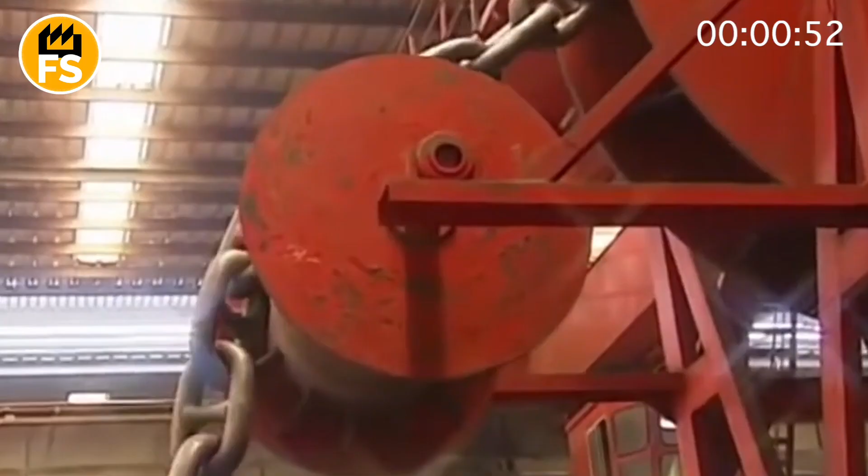stormy sea. These giants of marine engineering don't work in the quiet of a harbor, but in the harshest conditions on the planet, under insane weight, with temperature fluctuations from -40 degrees Fahrenheit to positive 120 degrees, in salt water that eats away even the strongest steel.

The first and most important step in producing anchor chains is choosing the right steel. For chains that must withstand tremendous tension in the open sea, low alloy structural steel with increased strength, impact resistance, and corrosion resistance is used. Its composition is selected so that the chain doesn't break from metal fatigue, isn't eaten away by salt, and doesn't

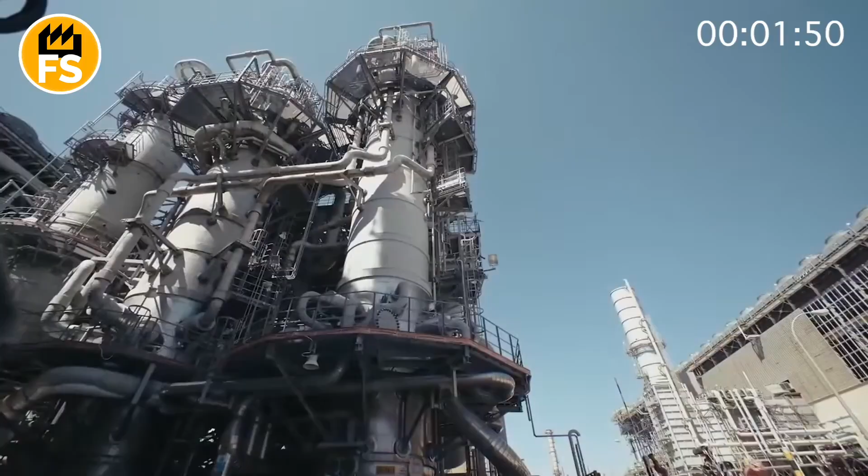crack from temperature fluctuations. Factories receive steel in the form of solid rods or square bars, which look like long metal beams. Their diameter usually ranges from 3 to 6 inches, and their length up to 10 feet. The weight of one such piece is hundreds of pounds. All of this is stored in open assembly yards or inside large metal hangars, because the parts can withstand any weather conditions. Before being fed into production, the steel is checked for purity of composition. Even minor impurities can make the metal brittle.

After quality inspection, the steel heads to the cutting lines. These are long automated sections, where massive rods are transformed into blanks for links. Each steel rod is picked up by a hydraulic manipulator and placed on a guide. Then, the main hero of this stage comes into play: a hydraulic guillotine press, or a cutting saw with carbide discs. The device calibrates the length, and when the blank is in the correct position, it presses with a force of thousands of pounds per square inch.

With each loud thud, a characteristic crunch is heard, and a piece about 3 feet long is separated from the rod. This piece will become one link of the future anchor chain. A counter is displayed on a special screen or directly on the machine's body. It tracks how many links have already been prepared and whether the length needs to be adjusted.

Each cut piece falls onto a conveyor or into a basket, where it is automatically checked by a laser scanner. If the system detects a deviation in length or an uneven end, that piece is sent back for remelting or trimming. The pieces that pass inspection are moved on to heating furnaces, where a bright orange heat of over 2,000 degrees Fahrenheit awaits them. This temperature allows the steel to soften without losing its structural properties. It is there that the steel will become pliable and ready for bending into links.

The cut pieces of steel, incredibly thick, rough, and heavy, are still cold, so they can't be bent at all. To give them the shape of a link, they need to be made pliable. The blanks are fed onto a roller line that leads directly into an induction or gas furnace.

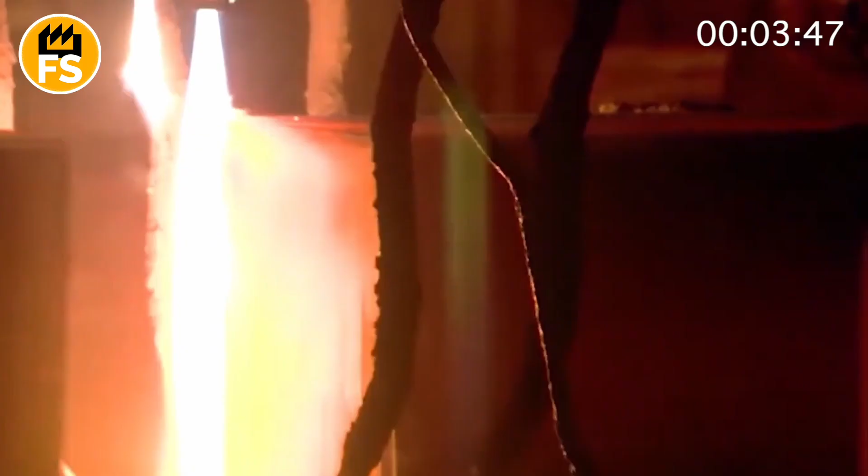Inside the furnace, a dull hum can be heard, and the air is heavy, hot, and saturated with a metallic smell. The blanks lie on stands or are suspended on special rods and are gradually heated for 20 or 30 minutes. Externally, they begin to glow, first cherry red, then orange, and finally almost white. This is a visual indicator. The steel piece is ready for forming.

As soon as the piece reaches the required temperature, it is quickly removed by a robot or a worker in a heat-resistant suit, because there's no time to waste. Steel loses heat very quickly, and if it cools by even 200 or 300 degrees, it will no longer be bendable. That's why the logistics of the hot chain production are so well coordinated.

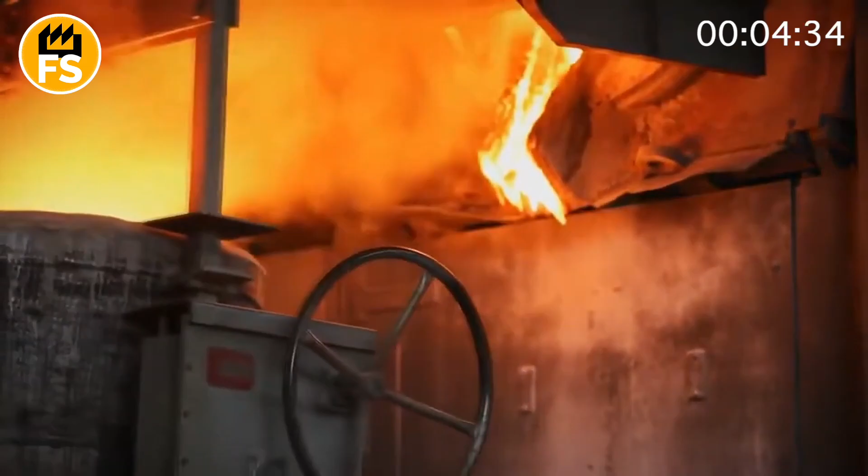Every second matters. As soon as the 2,000 degree Fahrenheit blank is removed from the furnace, it is instantly transferred to a bending machine, which looks like a hydraulic press robot with metal arms. These units can easily manipulate pieces weighing several hundred pounds, rotating, securing, and bending them with surgical precision.

The essence of the process is simple at first glance. The blank is clamped between two massive forming rollers, one of which rotates around an axis. At the same time, the other presses with a force measured in tens of thousands of pounds per square inch. The steel yields and smoothly bends, forming a perfect ring with a diameter of up to 4 feet.

While the metal is still soft, the ends of the link are joined, leaving the joint area slightly overlapped. Then the link is transferred to a welding station, where gas-shielded arc welding automatically begins. The temperature, over 5,000 degrees. The electric arc literally melts the edges and stitches them into one whole.

The finished link is almost a part of the anchor chain, but before it is connected to others, the seam must be ground, heat-treated, and checked for defects. And only after this does it become part of a chain capable of holding a supertanker weighing hundreds of thousands of tons in a rough sea.

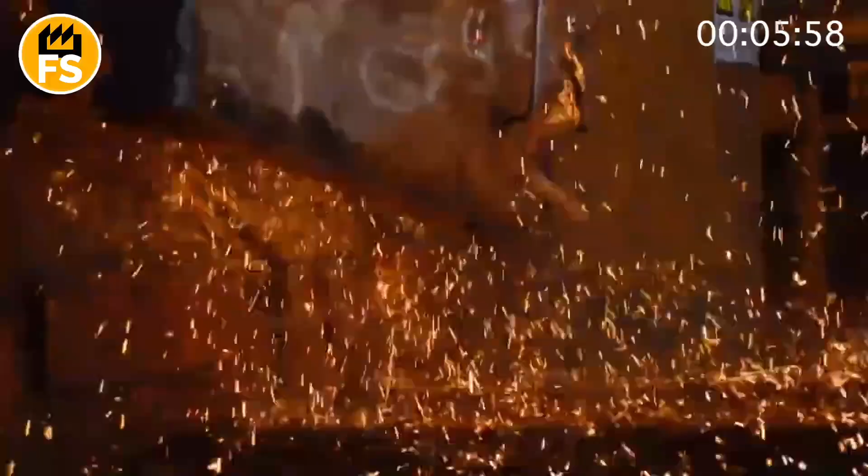While the link is still hot and pliable, it is immediately connected to the previous one, threaded through the already finished link. Only after this is the link closed, the seam welded, and this entire dual unit undergoes further processing. After all, it's impossible to open the previous link without damage, which would affect the chain's strength.

When a link is welded, a noticeable seam remains at the joint, a bit rough, with weld spatter and metal buildups. In this state, it won't pass any tests, as it could catch on other links or even become a weak point under pressure. So, grinding comes into play.

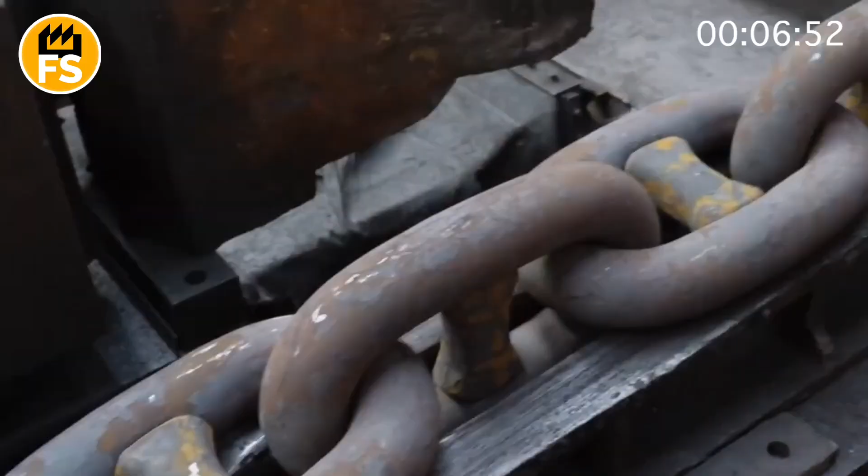On a huge table, similar to a workbench for airplanes, lies a link weighing under 300 pounds. It is secured so that the seam is clearly accessible. An abrasive machine or an operator with a powerful grinding tool gets to work, which roars, sparks, and makes a characteristic buzz sound.

The goal is to smooth the seam as much as possible, remove micro cracks and excess metal without damaging the main structure. Grinding takes place in several stages: first coarse, then medium, and finally, polishing. For this, discs of different grits are used, from 24 to 120, and sometimes even higher.

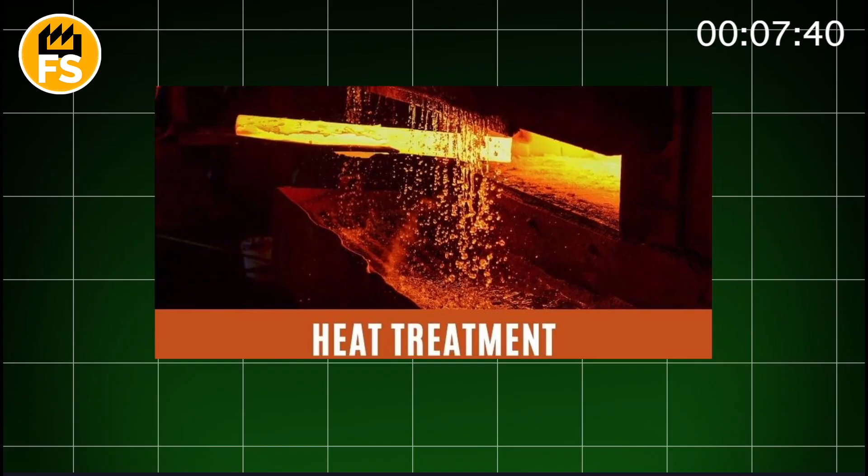After grinding, the link is blown with compressed air, cleaned of dust, and at this stage, it already looks like a perfect ring. But an external shine is not yet a guarantee of strength. So next comes heat treatment. Heat treatment strengthens the metal structure and makes the chain capable of withstanding insane loads in the depths of the sea. This is a complex series of thermal processes that are carefully controlled.

First, the links are heated in furnaces to a temperature of 1,700 degrees Fahrenheit. Huge chambers, resembling metallurgical tunnels, hold dozens of links at once. Here, it is important to achieve uniform heating throughout the thickness of the metal, so that no internal stresses arise that could cause micro cracks.

Next comes quenching. The links are rapidly cooled, usually in baths of oil, water, or a special salt solution. It is this temperature jump, from red hot to cold, that creates a hardened crystal structure in the steel. The result is increased hardness and wear resistance. But after quenching, the metal becomes too brittle. So the next stage is tempering.

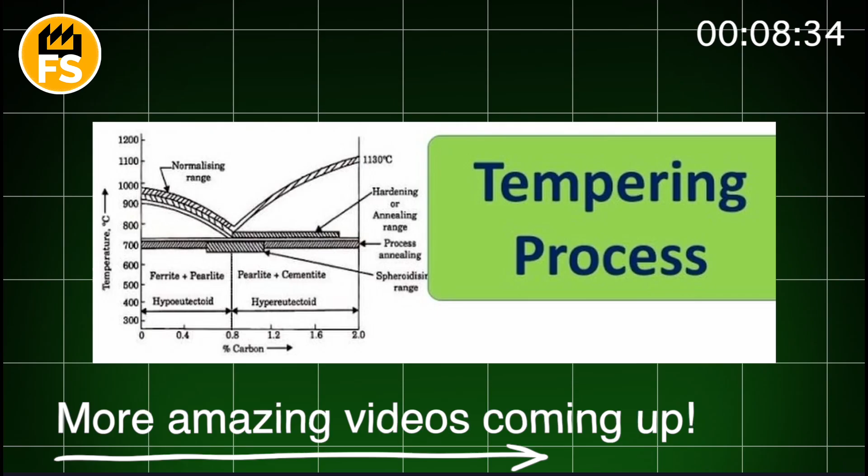The links are placed back in the furnace, but at lower temperatures, approximately 1,000 degrees Fahrenheit, and held there for several hours. This allows residual stresses to be relieved, restoring elasticity and a balance between hardness and strength. Sometimes induction hardening is used, where heating occurs locally, only in the areas that experience the greatest loads. For example, the inner surfaces of the link where it connects with others.

After heat treatment, the links are coated with an anti-corrosion layer that protects the metal from salt water, moisture, and rust. This is usually a hot dip galvanized coating, or epoxy paints, applied by dipping or spraying. Before this, the surface is degreased and ground again. The coating must lie evenly on every indentation, because the durability and safety of the entire structure depend on this.

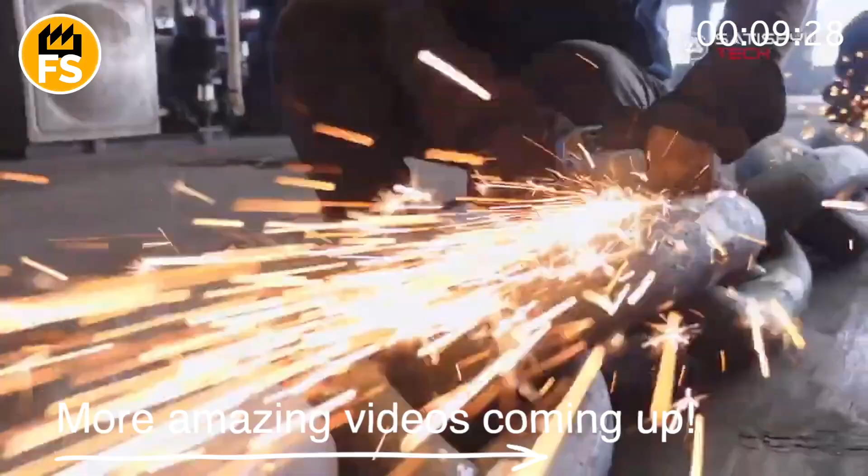Imagine taking the air you are breathing right now and turning it into a substance that can freeze ice cream in 3 seconds and make a banana tough enough to hammer nails. This is not magic. It is liquid nitrogen. Every second, it is used in medicine, science, the food industry, and in some top-secret experiments.

Temperature, -321 degrees Fahrenheit. One sip, and you lose part of your stomach. One breath, and you unlock tomorrow's technology. How does the coldest substance on Earth get made from regular air? How is it transported, stored, and used? And why can it save or destroy? Watch closely and prepare to be amazed.

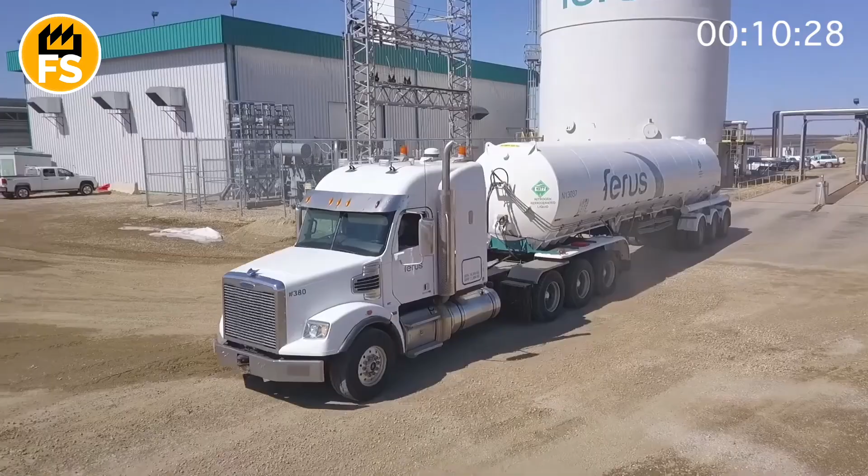It all begins with air. Yes, the very same atmospheric air that surrounds us. This happens inside industrial air separation units. These systems come in all sizes, from massive factory installations to mobile units for medical use.

Air is sucked in using compressors. Then it passes through filters. First, coarse filters that remove dust, insects, and pollen. Next, fine filters get rid of moisture, carbon dioxide, and other impurities. Once cleaned, the air is compressed using powerful machines, increasing both pressure and temperature. Then, it is gradually cooled in heat exchangers.

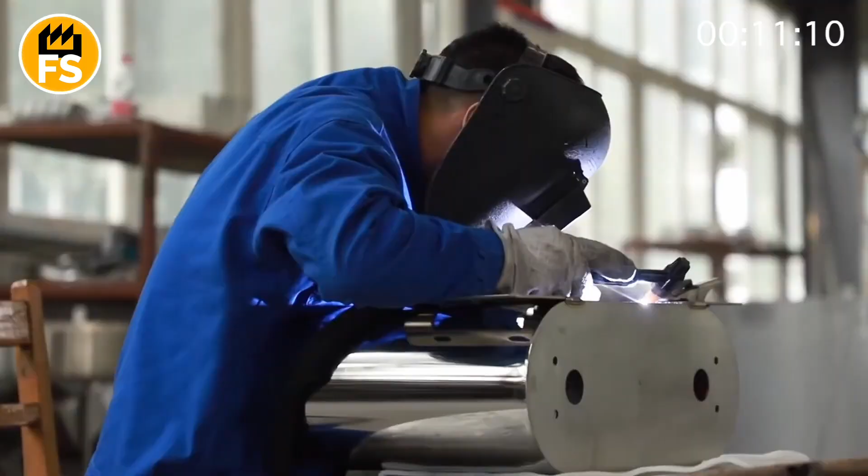When the high-pressure cooled air moves through a narrow nozzle into a low-pressure chamber, it expands rapidly. That sudden expansion causes a major drop in temperature. This is the key moment. The gas becomes cold enough to start condensing into a liquid. This process repeats several times. Each cycle drops the temperature further.

Eventually, nitrogen reaches its liquefaction point. This technique does not work with every gas, but it is perfect for nitrogen. Thanks to this, we can create liquid nitrogen from ordinary air. Once the air is chilled and liquefied, it goes through fractional distillation. This process separates the liquid mixture into components based on their boiling points.

Inside a special distillation column, the liquid air is gently reheated. Nitrogen has the lowest boiling point, around -320 degrees, so it evaporates first and rises to the top. Oxygen boils at -297 degrees, so it evaporates later and does not climb as high. Argon, with a boiling point around -302, settles somewhere in between.

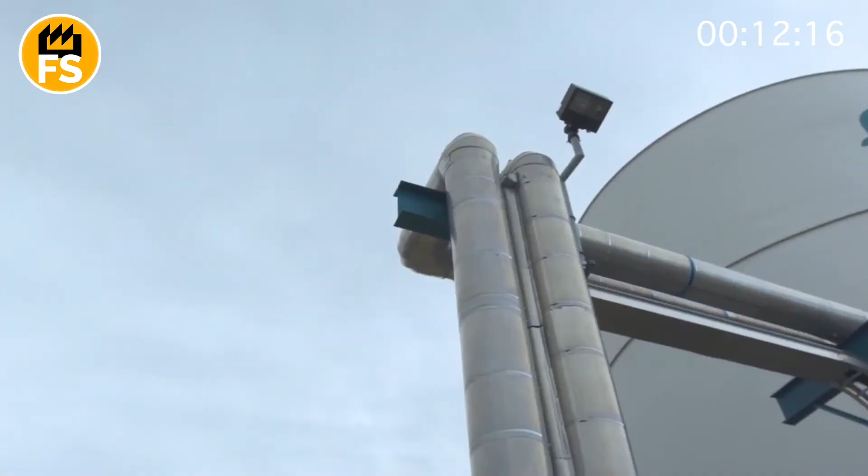The column forms a thermal gradient, colder at the top, warmer at the bottom. The gases evaporate and condense over and over, becoming purer with each cycle. It all works without additives, automatically, and with minimal losses, thanks to precisely managed pressure and temperature. Since nitrogen makes up roughly 78% of air, extracting it takes powerful equipment, a complex network of pipelines, and exact temperature control.

Once separated, liquid nitrogen is stored in special vessels, cryostats, or Dewar flasks, which look like futuristic thermoses. These vessels keep temperatures low and prevent evaporation. They are not just metal barrels. They have double walls with a vacuum in between to block heat. Some also include reflective coatings to minimize radiant heat loss. These containers can preserve liquid nitrogen for several days to several weeks, depending on volume, insulation, and how often they are opened.

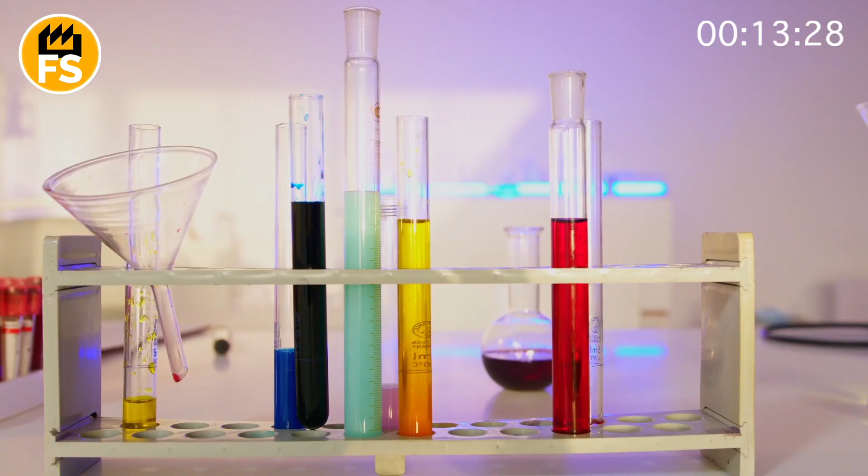Often, nitrogen is used right on site. For example, medical facilities use liquid nitrogen for cryopreservation of cells, embryos, vaccines, and tissues. In the food industry, it is used for flash freezing. Contact with liquid nitrogen instantly freezes food, locking in texture, taste, and shape. But when it needs to be transported, preventing evaporation is critical. That is because nitrogen quickly turns back into a gas.

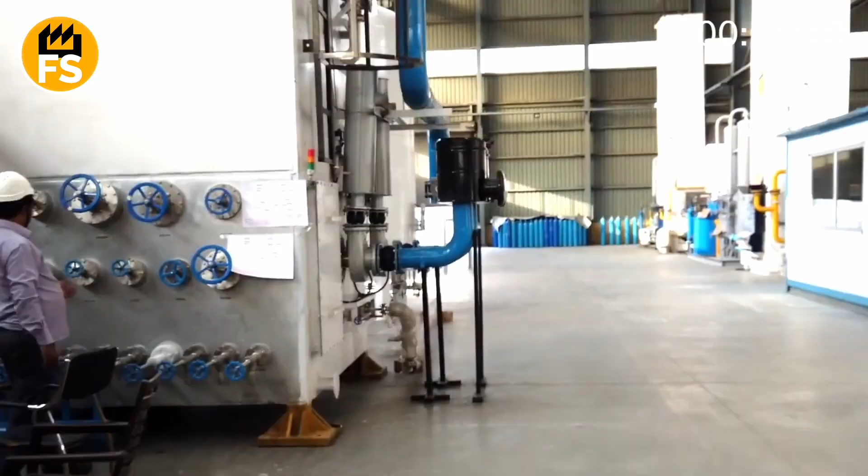Portable dewars, cryotanks, and cryotank trucks are used. Small dewars are handy for labs and clinics. Cryotanks are massive, like giant gas tankers, and are hauled by trucks with special mountings and ventilation. Cryotank trucks are purpose-built vehicles with insulation and pressure regulation to avoid explosions from expanding gas. Sometimes, liquid nitrogen is produced directly on site, at large research centers or hospitals, to avoid reliance on deliveries.

How did humanity tame one of the coldest, most inert substances on Earth? It all began with nitrogen. Discovered in the year 1772 by Scottish chemist Daniel Rutherford, who was studying air and found a gas that could not sustain fire or life. That was nitrogen, colorless, odorless, inert. But liquefying it required cold and pressure, and humanity needed more than 100 years to figure that out.

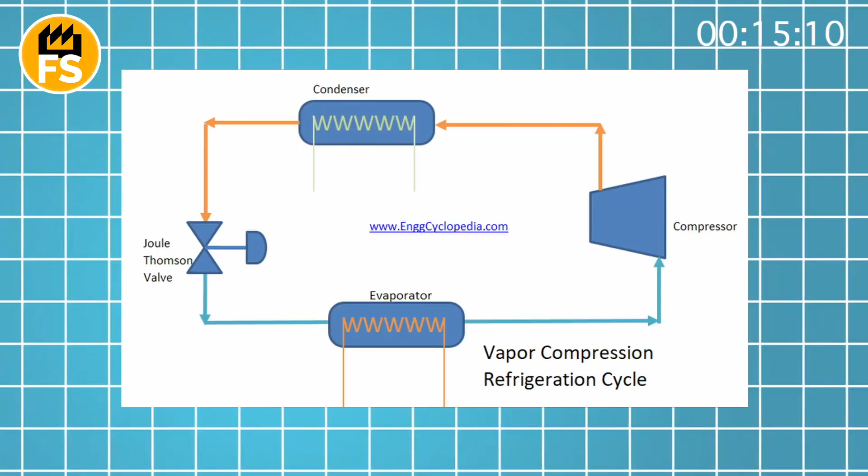The first liquid nitrogen was produced in 1883 by Polish scientists Zygmunt Wroblewski and Karol Olszewski. They built a system that cooled air so much that nitrogen, its main component, turned into a liquid. That was a breakthrough. In the 20th century, cooling tech advanced fast. Scientists improved gas liquefaction methods and eventually developed the Joule-Thomson cycle, which relies on pressure drops to efficiently liquefy gases.

In the 1930s and 50s, liquid nitrogen made its way into industry and medicine, starting in labs, then into surgeries, biobanking, and physics experiments needing ultra-low temperatures. Today, liquid nitrogen production is a global-scale operation. It is made in massive air separation plants around the world. What was once just background gas, making up almost 80% of air, has become a superstar of industrial science.

Some chefs even make ice cream live, pouring cream into a bowl, adding liquid nitrogen, mixing, and voila, instant dessert. The cold is so intense, it freezes the treat in seconds. Dip a banana in liquid nitrogen for a few seconds, and you can hammer nails with it. Seriously. Want to try? Inhaling cold nitrogen vapor can temporarily change your voice, like helium, but deeper. But do not try this. It is dangerous without protection and special equipment.

Some people have dipped old socks into dewars of liquid nitrogen. Result? The fabric becomes brittle like glass and crumbles in your hands. A perfect way to destroy evidence. If you are a sock. Pour liquid nitrogen on a warm floor, and it turns into a dramatic cloud. It vaporizes instantly, making you feel like you are stepping through a Hollywood portal.

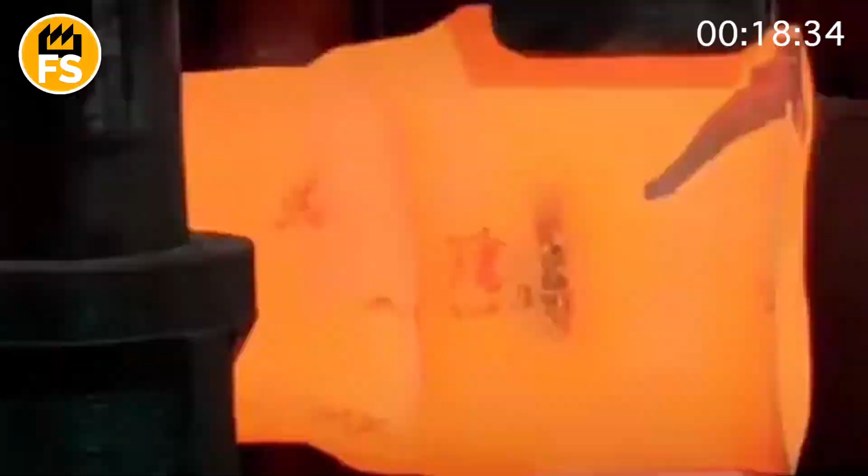How does a gleaming superdisk, capable of withstanding thousands of revolutions per minute, emerge from a gray, spongy mass? What do aviation, medicine, and the titanium hell of furnaces have in common? This isn't just manufacturing. It's a show of strength, precision, and engineering magic. Let's dive into a world where metal takes on its perfect form.

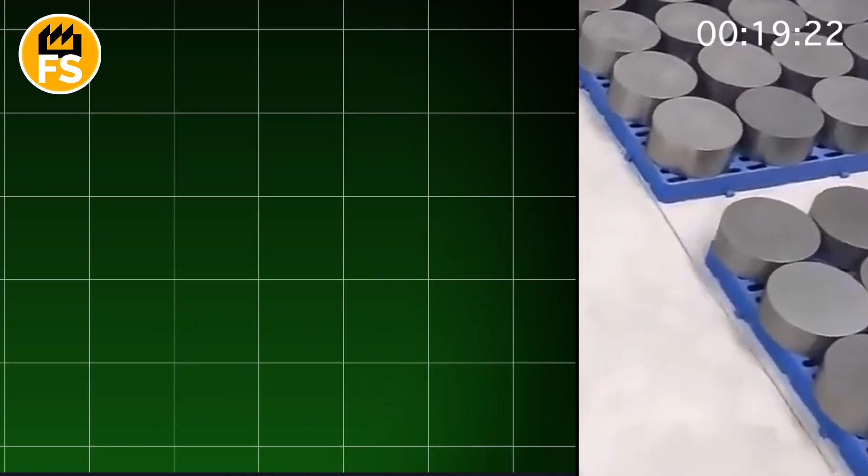Titanium discs are blanks shaped like thick discs made from titanium or its alloys. They serve as the starting material for parts in highly critical fields: aviation, medicine, space, energy, and automotive manufacturing. Titanium is a true superhero among metals. It's lightweight yet extremely strong, withstands insane temperatures, resists corrosion, and doesn't react with the human body. That's why it's used for everything, from aircraft components to implants.

But pure titanium is a bit finicky. It's difficult to machine and can be brittle under certain conditions. Therefore, it's often mixed with other elements, creating alloys. The most popular alloy consists of titanium with 6% aluminum and 4% vanadium. It's strong, wear-resistant, and easier to form. Aluminum adds lightness and heat resistance, while vanadium adds flexibility. For medical devices, pure titanium or alloys without toxic elements are used.

Depending on the task, titanium can be harder, more ductile, or more resistant to extreme conditions. That's why manufacturers choose not just titanium, but the specific alloy that perfectly meets the particular challenge. Titanium for discs comes from titanium sponge, the primary raw material extracted from ores, mainly ilmenite and rutile. The largest deposits of these ores are found in Australia, South Africa, China, Kazakhstan, and Canada.

But the sponge itself is produced where complex manufacturing facilities exist because the process of converting ore into metal is very energy intensive. It all begins with a dirty grey, pumice-like substance, titanium sponge. It arrives at the plant in large containers and bears almost no resemblance to the future aerodynamic part. But this is where the journey starts, ending with the gleam of a perfectly polished disc capable of withstanding thousands of revolutions per minute.

First, it's checked for impurities and moisture. Acids or solutions that react with impurities are used, removing them from the titanium surface. This process might involve treating the raw material in special baths. Titanium parts might also undergo abrasive treatment, such as grinding or sandblasting, to remove surface contaminants.

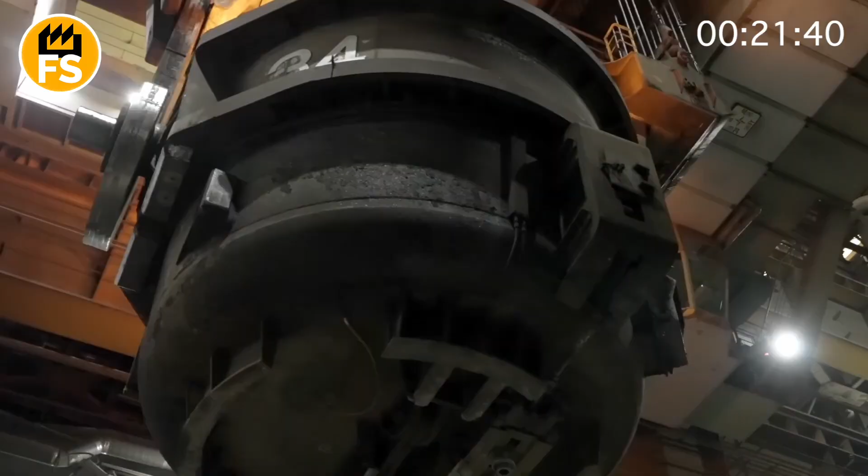After cleaning, the titanium raw material undergoes heat treatment to improve its structure. The raw material is heated to a specific temperature, usually between 1,300 and 1,600 degrees Fahrenheit, and held there for a defined period. This helps reduce internal stresses that might have occurred during previous processing stages. If necessary, the raw material can be heated to higher temperatures to achieve homogeneity in the alloy structure. This ensures an even distribution of elements within the material, enhancing its strength.

After heat treatment, the titanium undergoes a fascinating rapid cooling stage, which is quite a spectacle. When the metal is removed from the furnace, it glows with bright shades of red and orange, reflecting the high temperature it was heated to. Cooling can be done in several ways, by quenching in water or by air cooling. When submerged in water, you can observe the hot titanium creating foam and bubbles as it rapidly contacts the liquid, emitting a characteristic crackling sound.

This is visually impressive, as the boiling water witnesses an incredible transformation, from a potentially malleable state to a strong metal. Alternatively, air cooling is calmer, but no less captivating. The metal gradually loses heat, changing its color and texture. This process, although less dramatic, demonstrates the smoothness and elegance of titanium's transition to its final form.

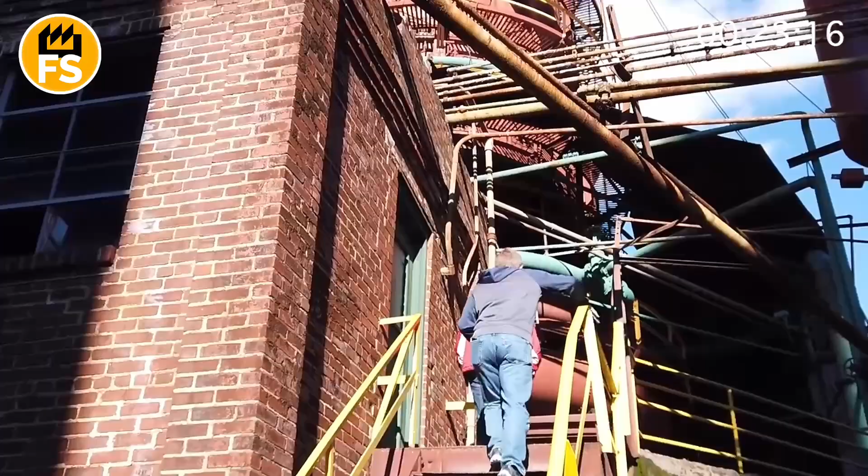Then, the material is loaded into special crushers or hammer mills. The main purpose of crushing is to reduce the particle size of the titanium, facilitating further processing and ensuring material uniformity. The crushed particles can be used in various processes, such as producing powder alloys or forming new parts. After crushing, the resulting particles may be washed to remove residual debris or impurities. They are then dried in preparation for further processing.

To manufacture the titanium discs themselves, the blanks are heated to high temperatures, typically up to 1,500 or even 1,800 degrees Fahrenheit. This is done to make the titanium softer and easier to work with. The heated blank is placed in a press or hammer. Impact action or pressure shapes the blank into the desired disc form. During this process, the titanium undergoes significant deformation, leading to changes in its structure.

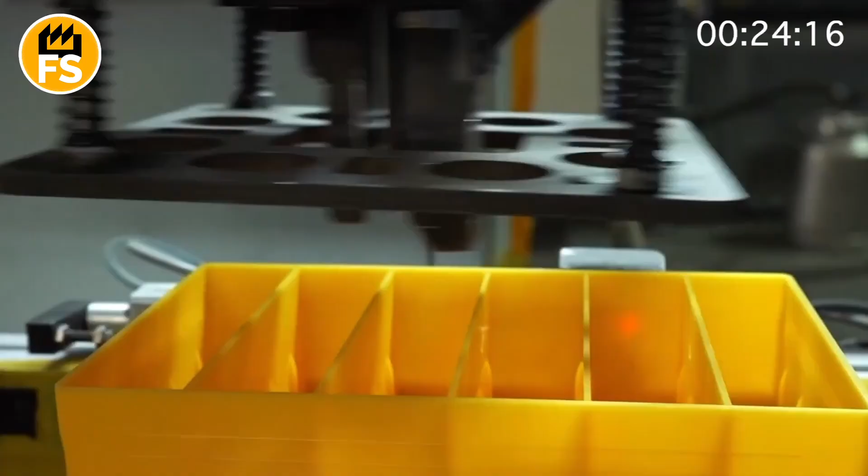For casting, however, special molds are made, usually from steel or cast iron. The molds must be very precise to ensure the correct geometry of the disc. The titanium is heated until it turns into a liquid. This is usually done in vacuum furnaces to prevent oxidation. The liquid titanium is poured into the prepared mold. After cooling, it solidifies, taking the shape of the disc. Casting allows for the production of discs with complex shapes that are difficult to achieve by forging.

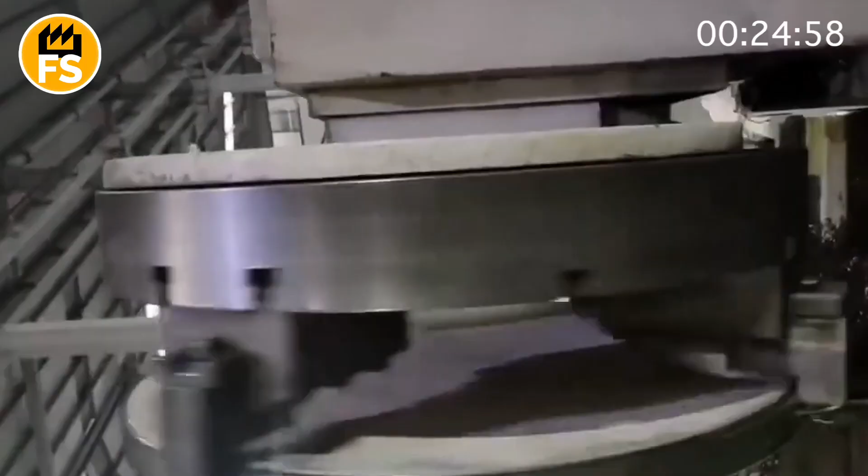Now it's time for machining. Before machining, the discs are cleaned of dirt and residues. For this, they are immersed in a special bath with a solution that removes slag and grime. The water foams up, and the disc becomes clean. Next, the discs are secured on lathes for stability during machining. A lathe is used to remove material from the edges of the disc, achieving the required diameter. Thin metal shavings curl away from the cutting tool like a slender snake.

The contours and profiles of the disc are formed according to technical specifications. If grooves or holes are needed, a milling machine is used. Then, the discs are processed by grinding machines to achieve the smoothest possible surface. This is important for reducing friction. Finally, they are polished to obtain a shiny surface, which also enhances their aesthetic qualities. Polishing can further protect the disc from corrosion.

After polishing, the surface becomes smooth, reducing the likelihood of dirt and moisture accumulation. Fewer imperfections and cracks mean fewer chances for corrosion. Polishing also seals microscopic pores that can retain moisture and contaminants. This significantly reduces the risk of oxidation. Afterward, the disc is inspected for scratches, cracks, or other visible defects. Calipers and micrometers are used for precise measurements of the disc's diameter and thickness.

To detect internal defects not visible on the surface, ultrasonic testing is performed. This inspection method does not require direct contact with the disc. A special transducer emits ultrasonic waves into the disc material. As the waves travel through the disc, they reflect off boundaries such as defects or the material itself. The time it takes for the waves to return to the transducer is measured. This allows for the detection and sizing of defects. Specialized software analyzes the received data, providing information about the disc's condition. This is a very fast process, allowing many discs to be checked quickly.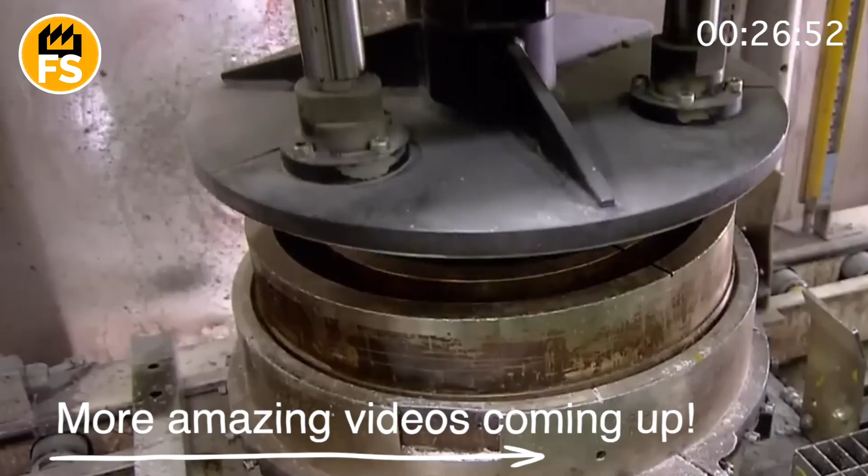Titanium is 40% lighter than steel, but has comparable strength, making it ideal for the aviation and automotive industries. It does not rust or corrode in most environments, making it a durable choice for various applications. In the United States, an average of 10,000 to 15,000 tons of titanium is produced annually. A significant portion of this amount is used for manufacturing discs and other components. Thus, on a monthly basis, this could amount to 800 to 1,200 tons of titanium discs.

Leading companies in the United States, such as Boeing and Lockheed Martin, actively invest in the production of titanium discs to meet the needs of their programs. It is expected that in the coming years, the demand for titanium discs for aviation will grow by 5 to 7% annually, especially considering new technologies and increased aircraft production.

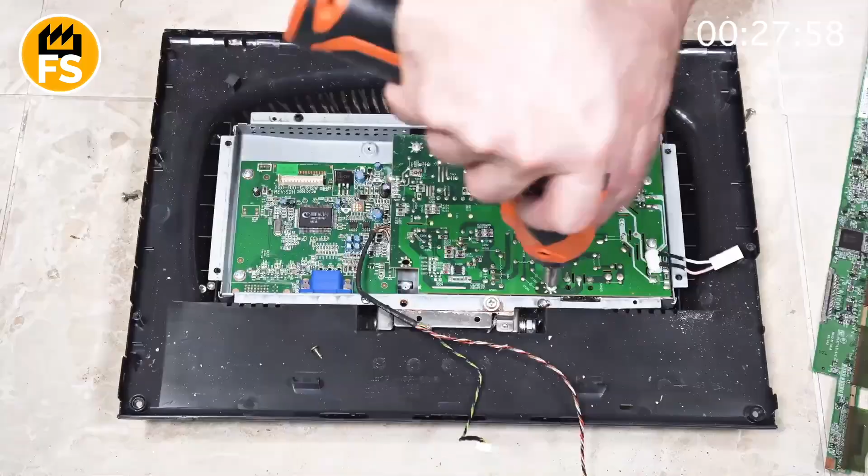As of the year 2025, approximately 135 million monitors are shipped to markets worldwide every year. This includes both new models and replacements for old ones, as part of a typical 4 to 5 year tech upgrade cycle. While it is difficult to pinpoint the exact number of monitors in global use, due to varying lifespans and growing demand, it is estimated to be in the billions. That is because as much as 66% of the global population uses computers. But what happens when it is time to recycle a monitor?

Cathode ray tube monitors, those old bulky screens, were common before flat screens took over. They contain glass with high lead content, phosphors, and electronic components. Lead in the glass can make up as much as 20% of a monitor's weight. Sounds dangerous, right? Light-emitting diode, or LED monitors, are the modern flat screens that use LEDs for backlighting. They are lighter and more energy efficient, but still contain plastic, metal, and rare earth elements.

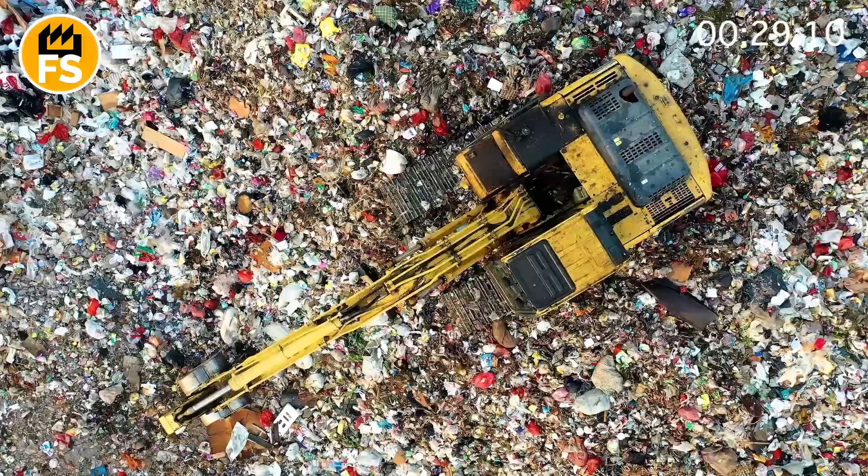Guess what? Mishandling these monitors can cause serious environmental problems. Lead from CRTs can leak into soil and water, and plastic from LEDs can take centuries to decompose. That is why recycling is not just a trend, it is a must. In the United States, over 4,400 million pounds of e-waste is generated every year, but only 25% is recycled locally. Every single day, Americans throw away more than 500,000 computers and mobile devices. This creates a massive environmental challenge.

Electronic recycling centers, like Repowered in Minnesota, play a key role in addressing this issue. Each year, they process about 3 million pounds of electronics, which makes up 5% of all electronic waste collected in the state. Impressive, right? These centers accept any device with a cord, except for large appliances, and ensure proper disposal or reuse.

Some states, like California, go even further. There, it is illegal to dispose of e-waste in regular landfills. California has over 600 drop-off locations, and recycling is funded through a fee on the sale of new monitors and televisions. By the way, California spans around 163,696 square miles. It is the third largest state.

Trucks are loaded with old monitors and driven to recycling centers. This method is typically used for short and medium distances. For long hauls, container shipping is used. It is more cost-effective and safer for large volumes of electronics.

At the plant, monitors are unloaded in the intake area, where trained staff inspect them for hazardous materials and evaluate their condition. The monitors are disassembled into key components, such as cathode ray tubes, display panels, power supplies, and other electronics. This process can be done manually or with specialized equipment. The separated parts are sorted by material type. Casings, power supplies, and other metal components are separated for further recycling.

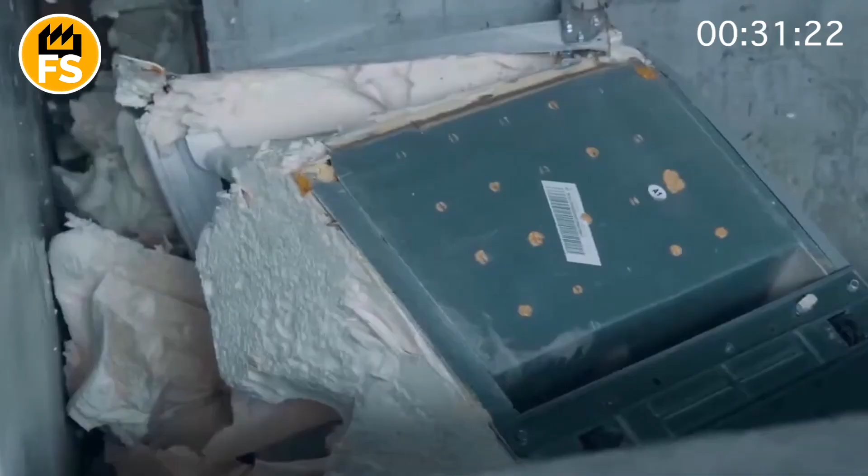Recycling metal parts from monitors looks like a full-on industrial operation. Massive machines work in sync to turn scrap metal into something new. Shredders roar. Furnaces blaze. The air is thick with the scent of molten metal and the noise of industry. Metal components are cleaned of contaminants like paint, plastic, and other non-metallic materials. This is done with machines that strip away surface layers and boost metal quality. Rotating brush systems or dedicated surface cleaning machines are used.

This step can also involve shredding, crushing, or other mechanical methods. Metals might also be treated with chemical solutions to remove corrosion and other residues, using acids or alkaline solutions to dissolve unwanted layers. Then, the metal is shredded into smaller pieces using large presses or industrial shredders. This makes it easier to process and transport. Next, metals are sorted by type. Ferrous metals are separated from non-ferrous ones. Each metal type requires a different recycling process.

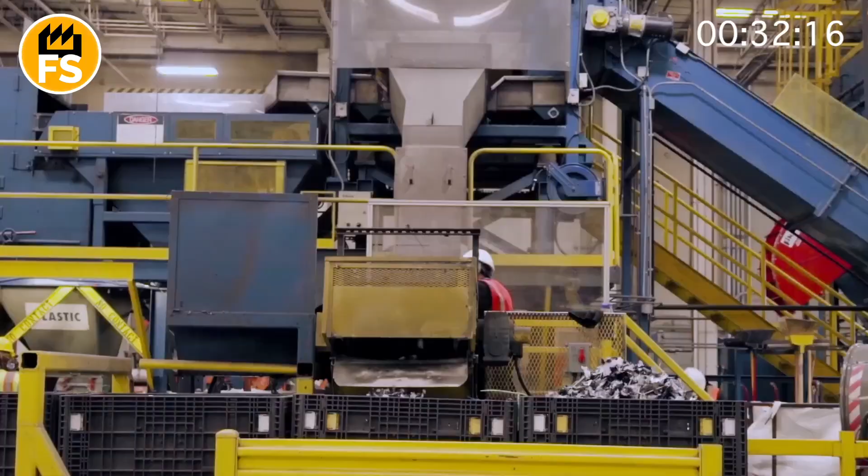The metal pieces are then melted down in giant furnaces at high temperatures. Steel melts at about 2,552 degrees Fahrenheit, while aluminum melts at around 1,112 degrees Fahrenheit. As the metal melts, impurities are removed and the material is poured into molds to form new ingots. These ingots are used to manufacture new metal products like construction materials, car parts, or home appliances. Using recycled metals cuts production costs and preserves natural resources.

At smelting plants, huge conveyor lines move metal pieces through different recycling stages. Workers in full protective gear oversee the process to ensure safety and quality. Thanks to this effort, old monitors are reborn as new, useful products, helping the environment and advancing sustainability.

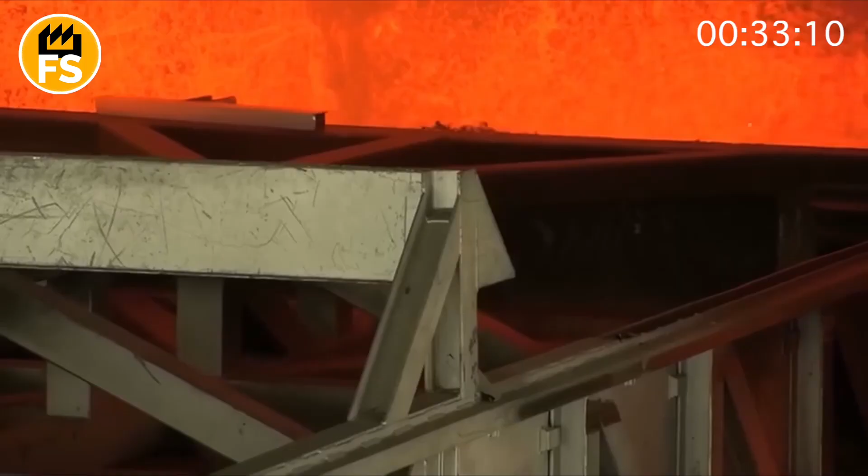Plastic components from monitors and other electronics are collected and sorted by type, usually polycarbonate, acrylic, and polystyrene. They are shredded into small pieces using machines like industrial shredders or crushers. This makes the plastic easier to transport and process. The shredded plastic is then cleaned to remove contaminants and impurities. This step uses air jets, magnets, or other tools, depending on the plastic type.

The clean, shredded plastic is melted and molded into pellets. These pellets become the raw material for making new plastic goods. In the United States, about 6,600,000 pounds of plastic are recycled annually. That is only around 8% of total plastic waste.

But those recycled pellets go on to make more than 100 million new plastic items every year. Shredders and crushers roar as they grind plastic. Conveyor lines move the material through different stages of processing. Recycling plastic saves about 88% of the energy compared to producing new plastic from raw materials.

A typical CRT monitor contains almost 3 pounds of lead in its glass. The leaded glass is separated from the monitor's other components. The cathode ray tube is disassembled into individual parts: the screen, the funnel, and the neck. The screen is made of activated glass, while the funnel holds the lead. The glass is cleaned of phosphor and other residues using chemical solutions or mechanical methods.

After cleaning, the glass is homogenized. During this stage, you can see giant rotating drums scrubbing paint and resins from the surface. The glass is then sorted by size and sent off for further processing. Thanks to this method, old leaded glass gets a new life while supporting sustainable development.

The glass is melted down in special furnaces at high temperatures. Lead is extracted and purified from impurities. This clean lead is used to manufacture new products like batteries, ammunition, or building materials. So yes, it is possible your old monitor might one day help protect the country.

Now let us move on to recycling circuit boards. Printed circuit boards are shredded using machines like hammer mills or industrial shredders. This helps extract most of the metal content. The resulting material is usually smaller than 2 inches in size. This shredded material is passed through magnetic separators and air jets to separate metal from non-metal elements.

Another method involves heating the circuit boards to high temperatures to burn away the non-metal materials and extract the metal content. However, this method can release toxic gases, so it is used with strict safety measures. During chemical recovery, you might see massive tanks filled with acidic solutions where metals are being separated. After extraction, the metals are purified and formed into ingots for manufacturing new goods. Through this process, old circuit boards are reborn as new, useful materials, supporting sustainability and protecting the planet.

LED display panels can be recycled for use in making new screens or other electronic components. While the process is complex and not always cost-effective, it is seen as a promising path forward. Some LED monitors contain rare earth elements, which can be extracted and reused. Recycling LED monitors saves up to 70% of the energy compared to making new items from raw materials.

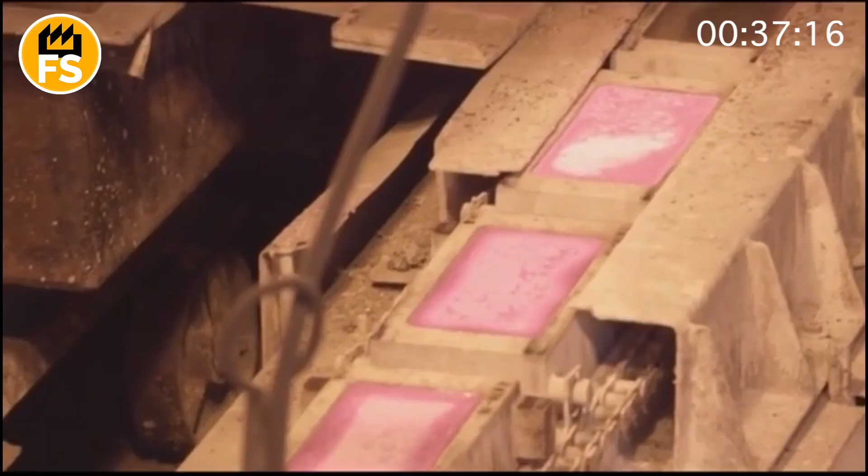What do an old iron and thousands of dollars have in common? That is right, copper. You know, just from one single cord, you can pull out enough copper to make brand new electronics. Every day, tens of thousands of old irons are recycled around the world, taken apart down to the very last screw. But how exactly does this happen? Why can even the sole plate be dangerous? And what is hiding inside the heating element? I am about to show you how dead irons come back to life, from being taken apart to becoming valuable raw materials.

Like other electronic appliances, irons are accepted at special electronics collection points. There, they are sorted into categories: those that can be repaired, those that need to be disassembled for parts, and those sent for complete recycling. Worn out or non-working irons are sent to recycling facilities, where the disassembly process begins. When an iron arrives at the disassembly line, specialists wearing protective gloves check it over. Some parts, like the heating elements, can be hazardous due to residual electrical voltage or toxic substances.

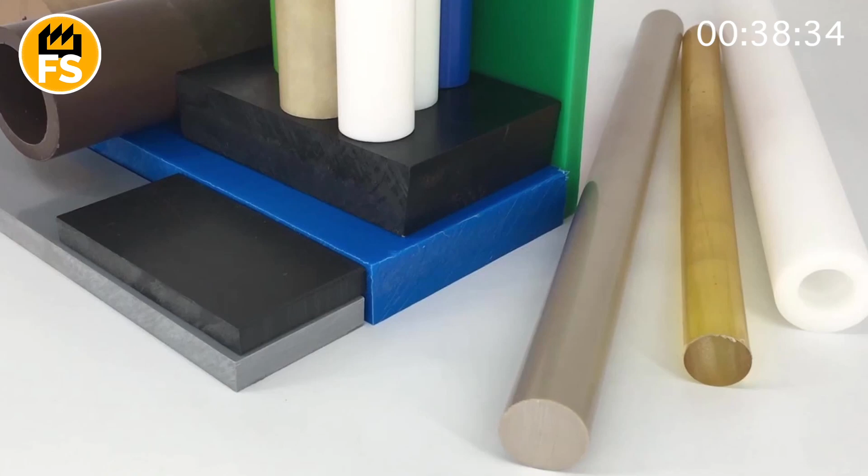First, they remove the electrical cord. Its insulation is usually made of synthetic plastic or rubber, and inside there is copper or aluminum wire. Synthetic plastic is durable, flexible, and water-resistant, but when heated or burned, it can release toxic substances, including dioxins, which are harmful to the environment and human health. That is precisely why disposing of it requires special methods.

The removed cord is not just set aside. It immediately goes onto a sorting line. First, it is chopped up in a special shredder into pieces about 1 to 2 inches long. This makes it easier to separate the metal from the insulation later on. Next comes the material separation.

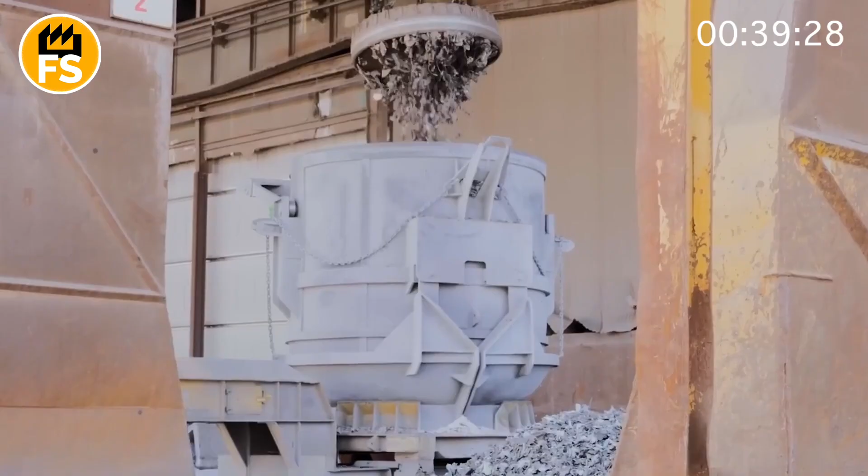This is usually done using mechanical or electrostatic sorting methods. What does that mean? What kind of fancy words am I throwing at you here? Look, the copper and aluminum wires are separated and sent off to metallurgical plants for melting. The shredded plastic or rubber goes for recycling, for example, to make new cable insulation or other products. If the insulation contains harmful additives, it might be incinerated in special furnaces equipped with filters or sealed away in a landfill.

Separating the copper and aluminum from the shredded electrical cords happens in several stages. So, after the cord is shredded, the pieces are sent to a granulator. This is a special grinding machine that breaks down the pieces of wire into even tinier particles, measuring about 4/100ths to 8/100ths of an inch across. This is how the metal and plastic get separated.

Next, the mixture goes into an air separator. This uses a stream of air that lifts the lighter particles up, while the heavier ones fall down. This way, the plastic is separated out even before the main process. If there are any steel components in the wires, like a thin shielding layer or reinforcing fibers, they are removed using a magnetic conveyor belt.

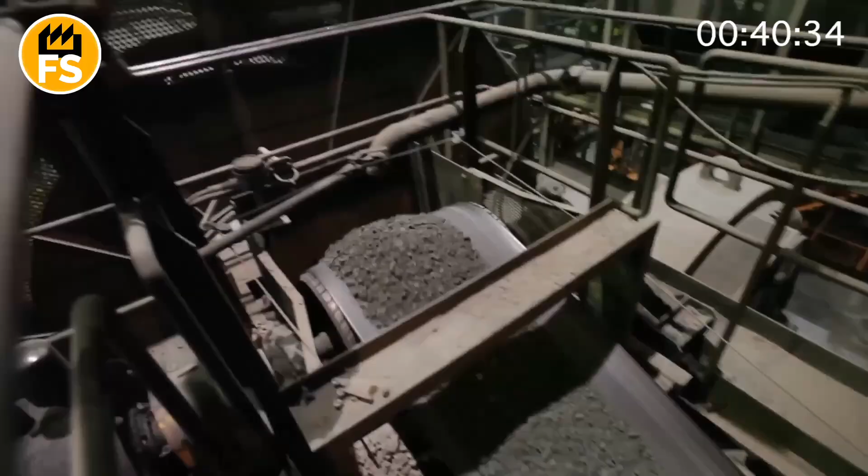But the tricky part is, the little pieces of aluminum wire and copper wire get mixed together, so now they need to be separated. To do this, the metal particles are sent into a metal drum that is charged with high voltage. Copper has different electrical conductivity properties than aluminum, so under the influence of electrostatic forces, they bounce off in different directions and are collected in separate containers.

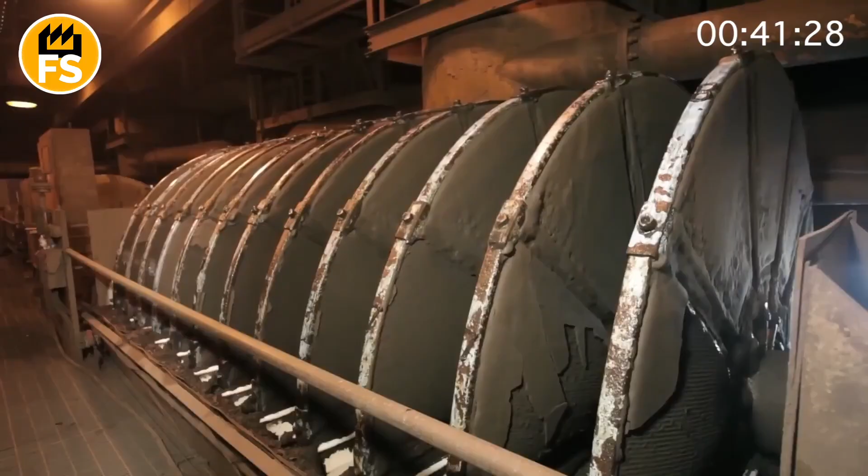After sorting, the materials are checked again, either by hand or using automated systems. Copper, which is 99% pure, is melted down at a temperature of 1979 degrees Fahrenheit and used for new cables. Aluminum melts at 1220 degrees Fahrenheit and is used to make parts or casings for electronics. This process allows up to 95% of the metals from the cords to be reused, reducing the need to mine new raw materials.

Meanwhile, back at the iron, the housing is unscrewed. This could be a plastic or metal shell, depending on the model. A worker wearing gloves firmly secures the device on a table coated with a thin layer of metal shavings, leftovers from previously disassembled appliances. An automated screwdriver mechanism, humming almost silently, moves toward the first screw. The bit fits precisely into the screw head, makes a few quick turns, and the loosened screw flies out into a special container, clinking against the sides.

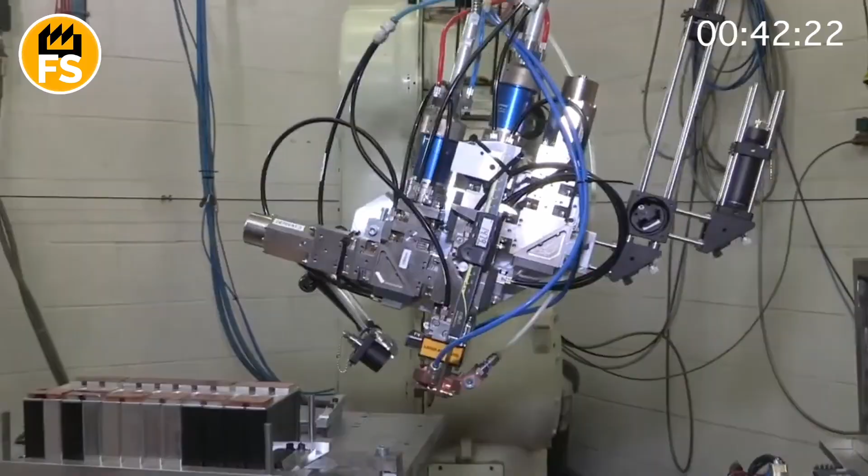The housing still holds on, as if resisting its fate. But the hands of the technician, seasoned by thousands of these operations, know how to make it give way. A slight pry with a tool under the edge of the housing, and there is a familiar click, like an old machine sighing. The plastic cracks, yields, and then splits into two parts, revealing the device's insides.

If the housing is metal, it all happens with different sounds. The metal screws fall heavier. The housing slides across the table with a dull clatter. Sometimes, special cutters have to be used. Sharp blades sink into the thin metal, leaving behind jagged edges that glint under the lights. Finally, the shell is removed, and the device, just a moment ago solid and sealed, seems almost vulnerable. Its insides exposed, ready for the next stage of disassembly.

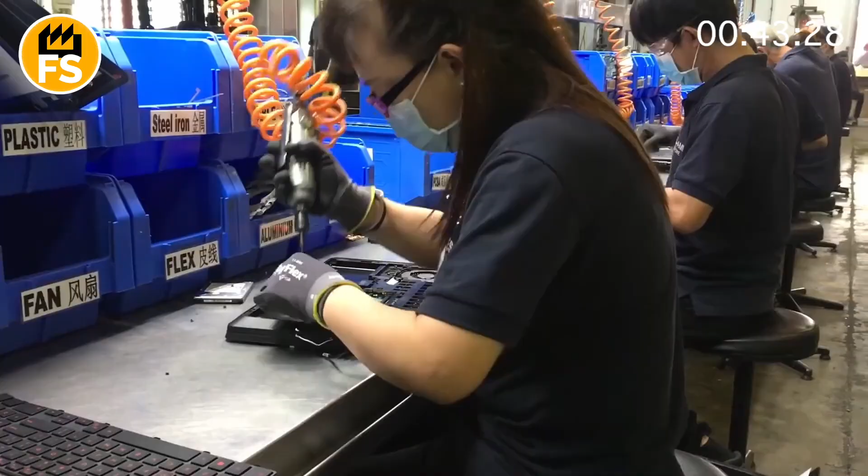Once the housing is off, the heart of the device is revealed. The circuit board and the heating element connected by a network of thin wires. They are like the veins that powered the appliance in its former life. Tweezers with pointed tips move towards the first contact point. A gentle tug, and the wire pulls away from the board with a faint snap, exposing a tiny copper core. Another tool, resembling a miniature pry bar, slips under the edge of the board. A little pressure, and the board pops out of its place, leaving behind a web of connectors and mounting points.

The heating element is the next hurdle. If it is ceramic, it sits inside like a white heart, sometimes coated with a grayish film from countless heating cycles. If it is a nichrome coil, it is wound into a delicate spring, resembling a dried leaf. It is removed carefully to avoid damage, because even the smallest break can complicate further processing. And just like that, with a few more movements, the once unified mechanism falls apart into separate components. The circuit board and heating element are separated, ready for sorting and further processing or disposal.

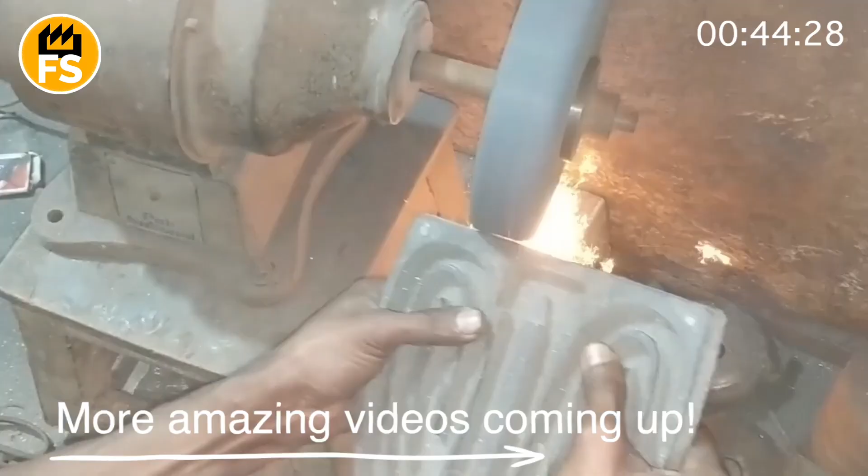The last part holding its ground is the sole plate. It has absorbed thousands of heating and cooling cycles, signs of use, scratches, and faint traces of scorch marks. It is the sturdiest part of the device, and removing it is not so easy. To get it off, they take a tool similar to a thin pry bar and wedge it between the main body and the sole plate.

A barely perceptible push, and you hear a characteristic scraping sound as the metal begins to yield. If the sole plate is aluminum, it bends under pressure, making a slight crunching sound. A ceramic one stays put until it gets a precise tap, after which it separates from the body with a muffled thud. If it is stainless steel, it puts up the most resistance. It often has to be unscrewed by hand or pried off using special levers.

Finally, the sole plate is detached. It drops onto the metal table with a dull thud, leaving traces of grime on the worker's fingers. This is the last major piece, and now the appliance is completely disassembled, ready for further sorting and recycling.

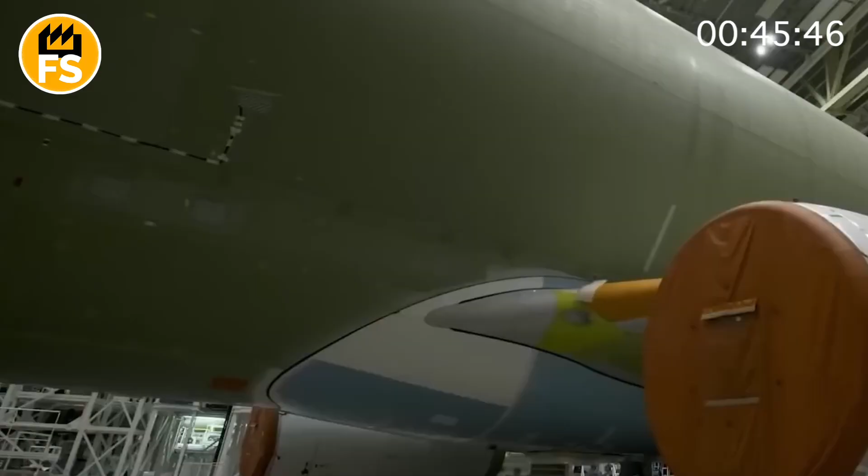Imagine a plant spread out over 11 million square feet, where thousands of specialists work every single day to assemble an aircraft made up of more than 4 million parts. Here, in Toulouse, France, giants of the sky are born, from the legendary A380 to the cutting-edge A350. Parts for these aircraft come in from all over the globe. Wings from Britain, the fuselage from Germany, and engines from the United States.

This is not just a plant. It is the heart of European aviation and a true marvel of engineering. And now we are going to take a look inside. The Airbus plant in Toulouse covers an area of over 11 million square feet. Now, that is an impressive size for any manufacturing complex, and especially so in the aviation industry.

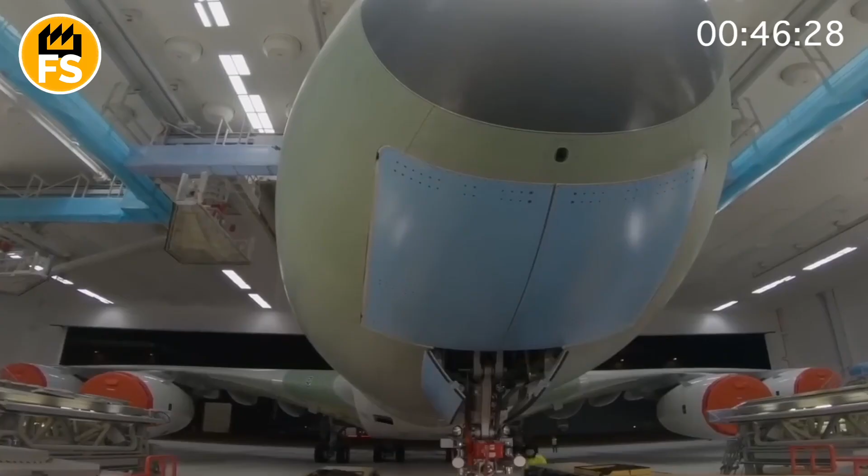This plant produces not only the A380, but also other aircraft models from the company, like the A350. To produce these technological wonders, Airbus uses more than 2,000 workstations equipped with the very latest technology. This plant is the heart of Airbus aircraft production and a complex logistics hub, where every stage of aircraft manufacturing is its own form of art.

The Airbus plant in Toulouse was actually founded way back in 1946 under the name Aerospatiale. Initially, it was a French company specializing in aviation manufacturing, and it laid the groundwork for the future Airbus plant. All the early stages of the plant's operation involved creating aircraft for both military and commercial needs.

The Toulouse plant was strategically chosen for its location, which provided convenient access to transportation and logistics routes within France and across Europe. Originally, the plant focused on developing smaller aircraft, but over time, it expanded its capacity and implemented new technologies to produce large passenger aircraft.

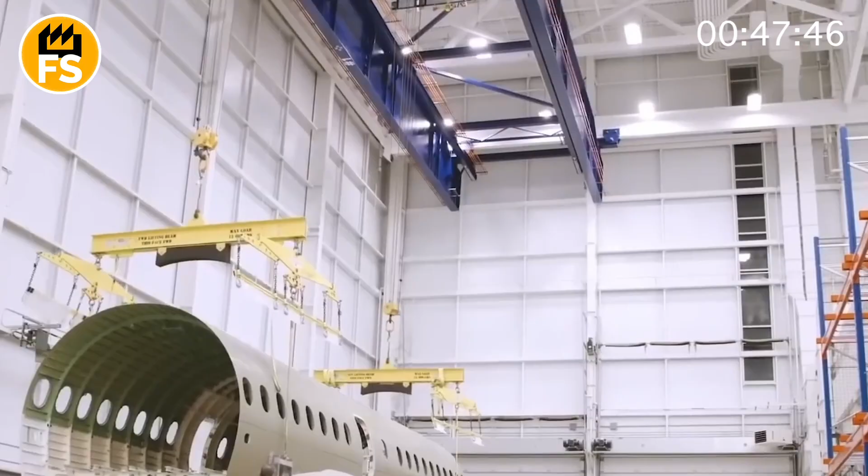Over the following decades, the Toulouse plant expanded multiple times as aircraft production really picked up speed. In the late 1980s and early 1990s, the plant became the main hub for producing aircraft like the Airbus A300, the first certified wide-body aircraft, and the A320, one of the most popular aircraft in the history of civil aviation. Over time, the Toulouse plant became the primary production center for models like the A330, the A340, and the A380, that huge double-decker aircraft that became a symbol of Airbus.

In the 2000s, the Toulouse plant underwent major changes and modernization to handle the production of newer models, like the A350, which was introduced to the market in 2013. For this purpose, new assembly halls were built at the plant, including large facilities for assembly and testing, along with new automation systems to boost production efficiency and precision.

Manufacturing the Airbus A380 is such a complex and detailed process that it requires innovative methods and technologies for its assembly. Just imagine, each aircraft produced at the plant consists of over 4 million individual parts. These parts are supplied from all around the world, from China to the United States. For example, the main fuselage components come from Germany, the wings from Great Britain, and the tail section from Spain.

That is right, the Toulouse plant primarily handles the final assembly of the aircraft. This is standard practice for major aircraft manufacturers. Major engine manufacturers, like General Electric and Pratt & Whitney, supply the powerful jet engines for Airbus aircraft. Additionally, various aviation systems and components arrive from the United States.

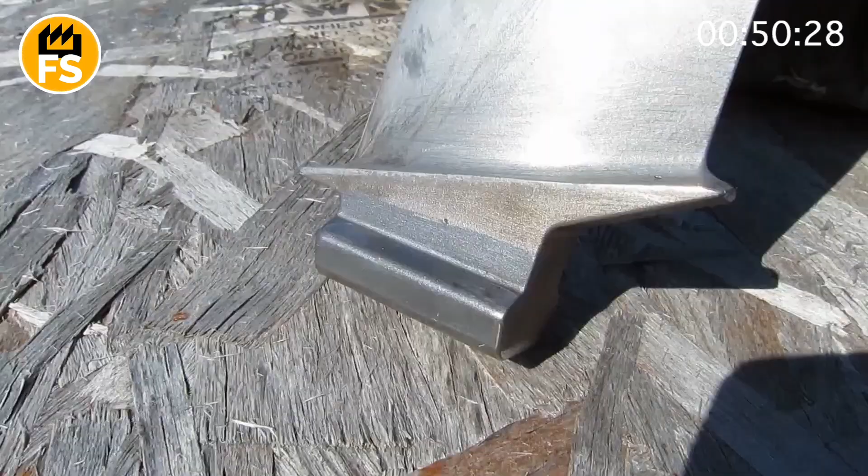China is a key supplier of various metal parts, plastic components, and other materials for the aviation industry. Furthermore, Chinese companies provide certain aerodynamic parts. Other parts, including structural elements and fuselage details, are supplied by various European countries, such as Germany, Italy, Spain, and Great Britain. Well-known Canadian companies, like Bombardier, also supply components for different Airbus models, notably for the A220.

After being manufactured, these parts are transported to the plant in Toulouse, where they are assembled into a single, complete unit. This often takes several weeks, and the large components are transported using specialized methods, like ships or air transport. The Airbus plant in Toulouse covers an area of 11 million square feet. It is one of the largest aviation manufacturing sites in the world.

First, inside the plant's enormous assembly halls, the aircraft fuselage is put together. This is the main body of the aircraft, composed of several large segments that are delivered separately. Each fuselage segment is a major part of the structure, joined together with the others using cranes and specialized assembly machines. A crane lifts the parts, and they are carefully connected using special bolts and welding techniques. This is how the frame structure begins to take shape.

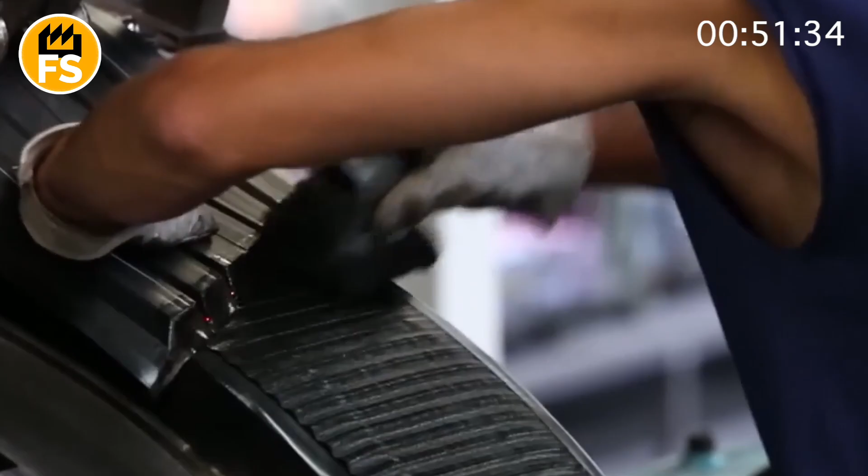Although it is not yet in its final form, once the main fuselage sections are assembled, the wings are brought into separate areas for installation. These wings are heavy, and their installation also involves the use of hydraulic cranes. When the wings are ready, they are attached to the main fuselage structure. Special attention is paid to this stage because the join between the fuselage and the wings is a critically important part that affects the aircraft's aerodynamics and safety.

The installation of all the necessary systems, electrical, hydraulic, and avionics, also happens during this phase. Parts are integrated in special clean rooms to prevent any damage or contamination. This is a highly precise process, as all the elements, like cables, pipes, and computer systems, must be correctly positioned within a limited space. Robotic systems are often used at this stage for the precise placement of these elements.

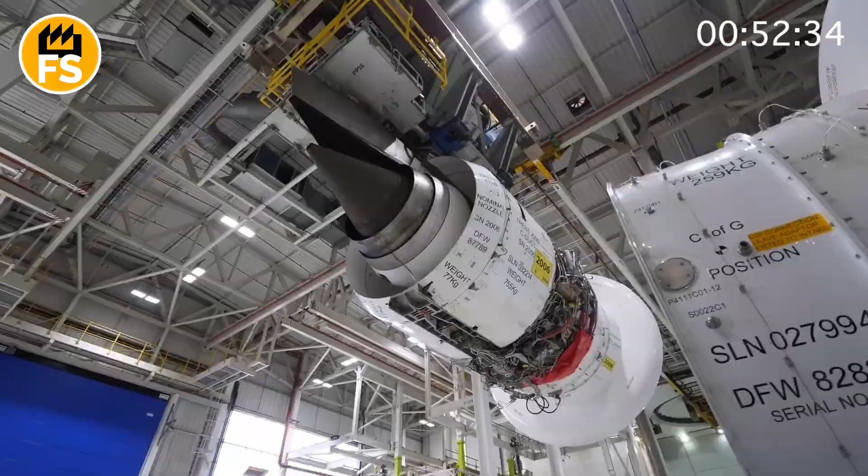Once the aircraft structure is nearly complete and all internal systems are connected, it is time to install the engines. This is another critically important step, as the engines play a significant role in the aircraft's overall stability. Large hydraulic mechanisms and cranes are used to lift the heavy engines and precisely attach them to the aircraft structure. This also demands a high degree of precision and care.

As soon as the aircraft is assembled and the engines are in place, it undergoes a series of tests and checks. On the ground, they conduct tests on the braking systems and check the aircraft's response to mechanical stresses. All these operations take place on enormous testing grounds, which allow for trials involving various loads and speeds. At the same time, the functionality of all the aircraft systems is verified. The testing area itself covers about 2 million square feet.

After all the tests and adjustments are done, the aircraft moves on to the finishing stage, where it gets painted and the final details are added: window sealants, stripes, logos, and other design elements. Before the paint is applied, the aircraft is thoroughly cleaned to remove any contaminants, grease residues, or dust. Following this, the metal surface is treated to ensure better paint adhesion.

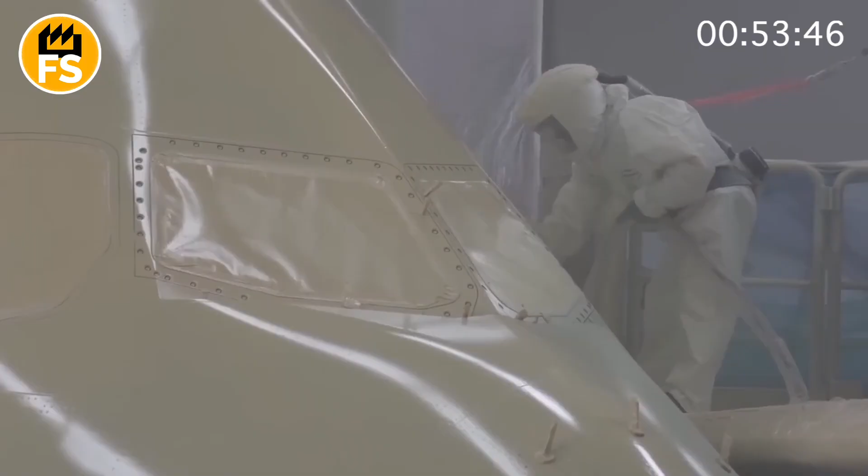An important step is the application of an anti-corrosion coating, which protects the aircraft body from oxidation and other harmful factors. This coating is applied using special sprays or spray guns to create a uniform protective layer. The aircraft is then painted in several layers. Most often, special polyurethane paints are used, which provide a durable, resistant coating. These are applied using rotary atomizers, which allow for even distribution of paint across the entire surface.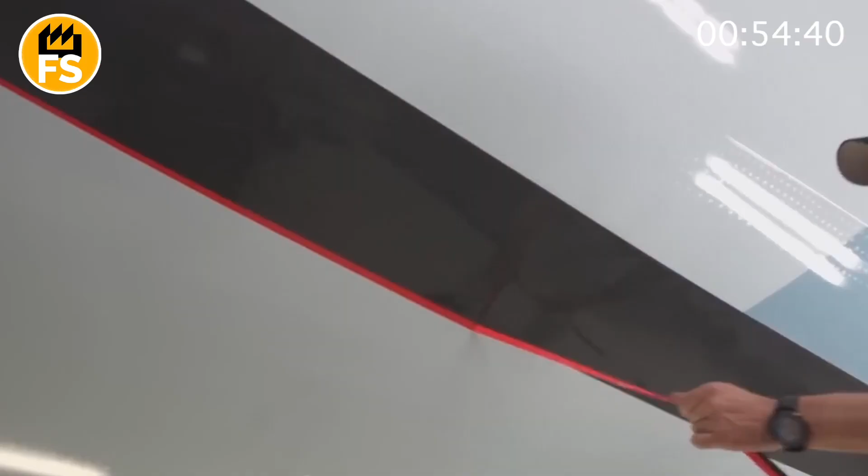The aircraft is placed inside a special painting hangar, sort of like a large enclosed area, where the necessary temperature and humidity levels are maintained to ensure proper paint adhesion to the surface and facilitate quick drying. After the base color is applied, a top coat is added, which provides extra protection against atmospheric elements and also gives the aircraft a glossy finish. This layer also adds resistance to ultraviolet rays, preventing the paint from fading in the sun.

After painting, the aircraft are inspected for any defects. If any cracks or bubbles appear in the paint, they have to be corrected. In the final stage, airline logos or special liveries are applied to the aircraft. This might involve not just applying paint, but also installing special decals or applying a protective film to the surface. This process can take up to several weeks for a single aircraft, depending on the size and complexity of the livery. In total, painting a complete Airbus aircraft requires about 3,300 pounds of paint.

The process of installing the cockpit is one of the most complex and precise operations. The aircraft cockpit, especially in models like the A350 or A380, contains hundreds of different sensors, control systems, displays, and other technical elements that must be precisely configured. Altogether, a cockpit can contain up to 5,000 different parts.

Interestingly, the assembly of the cockpit takes place separately from the main aircraft body. This is done in special workshops where the cockpit is fully equipped before being transported for final integration into the aircraft. The entire cockpit installation process takes several days and demands the highest level of precision, because any malfunction in the control or navigation systems could lead to serious problems during the aircraft's operation.

Another crucial aspect is the integration of avionics, which are the aircraft's electronic control systems. These systems allow pilots to monitor flight parameters, engine status, the situation in the sky, and perform other critically important functions. Installing the avionics takes anywhere from several days to several weeks, depending on the complexity and type of the aircraft. More than 10,000 people are involved in the aircraft assembly process, including engineers, technicians, testers, and other specialists.

The production cost for a single A380 aircraft is around $445 million, making this project one of the most expensive in the world of aviation. Just for the development of new technologies and the improvement of automation processes, Airbus spends millions of dollars every year.

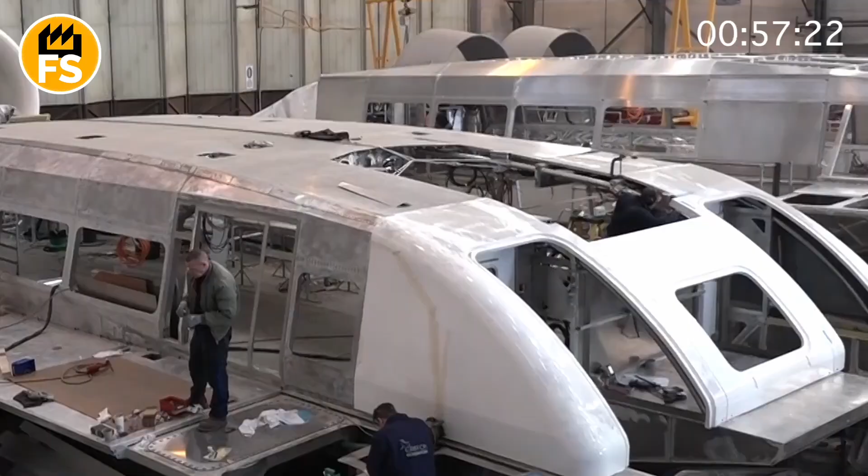The idea of using an air cushion came from the British engineer Christopher Cockerell in the 1950s. He experimented with airflows using tin cans and a hairdryer, ultimately creating the concept of a vehicle that could glide over any surface. In 1959, the world's first real hovercraft was launched. Later, this technology found its way into military use, specifically in LCAC-type landing crafts developed in the United States during the 1970s. So, Cockerell invented it, but the military refined the idea into its modern form. Let's move forward. Or maybe sail ahead.

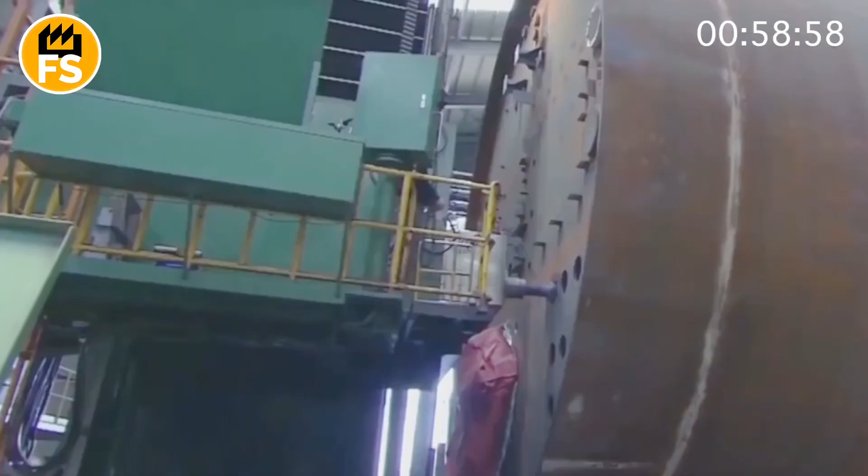Manufacturing hovercraft landing crafts involves several stages. Initially, design bureaus create drawings and digital models of the craft. The design process depends on whether it's a new project or an upgrade of an existing one. Creating a completely new hovercraft takes from 6 to 12 years. Imagine that. Preliminary design and concept stages last from 1 to 3 years. Developing drawings and digital models adds another 2 to 5 years. Building and testing the prototype takes an additional 3 to 5 years. Finally, we get a ready-to-use craft.

If we're talking about upgrading an existing design, the process takes half the time. Analysis and adaptation of drawings take from half a year to 1 year. Updating digital models takes only 1 or 2 years. Building and testing the updated version takes 2 to 3 years. The newest American hovercraft, called the Ship-to-Shore Connector, replacing the LCAC, began development in the 2000s. The first test models were ready in 2012 and 2014, but full-scale production started only in the 2020s. The process is lengthy because these crafts must be reliable, fast, and suitable for challenging operational conditions.

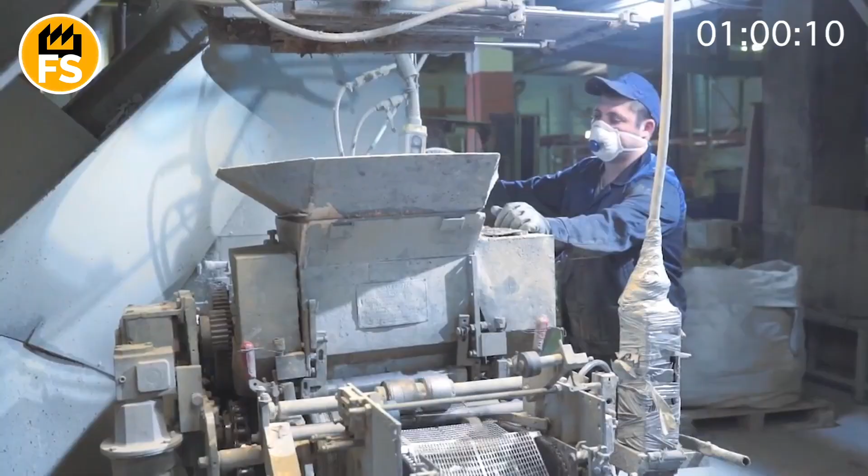After drawings and digital models are developed, suppliers of materials and components are selected. The military announces tenders, where companies compete for contracts. Manufacturers must pass certification and prove their materials withstand extreme conditions. Some components are produced exclusively domestically for national security. Thus, the process is complex but critically important. If even one component fails, the entire mission can be jeopardized.

The craft's frame is assembled at shipbuilding yards. These massive industrial complexes are usually located on coastlines or near large rivers. They cover areas from dozens to hundreds of acres, since multiple vessels must be built simultaneously, with space for storing materials and heavy equipment. There are huge covered or open areas where ship hulls are assembled. These areas can be from 500 to 1,500 feet long to accommodate large structures. In metalworking workshops, aluminum alloys for the LCAC hull are cut, welded, and shaped using robotic machines and laser cutting.

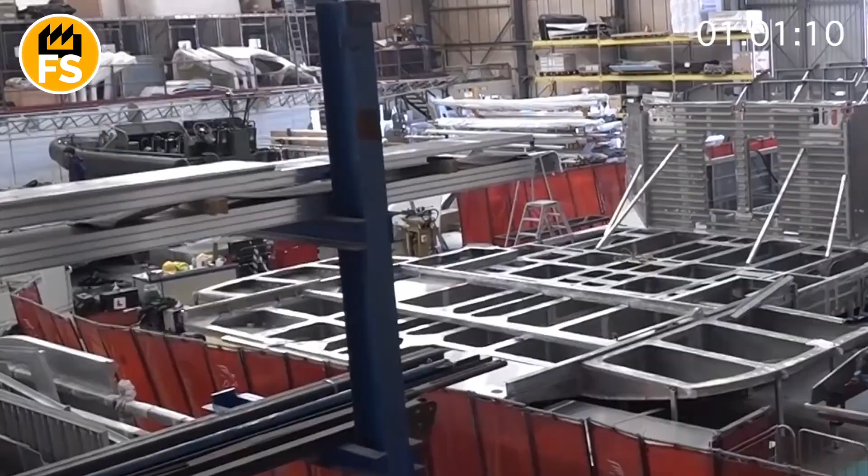Shipyards also include dry dock basins, enormous artificial pools, where finished crafts are tested before launching. Massive gantry cranes with lifting capacities from 100 to 1,100 tons move large sections of hovercrafts. Additionally, there are areas for installing gas turbine engines, radar, and navigation systems, as well as logistics yards, where incoming materials and components from suppliers are stored.

One of the largest such shipyards in the United States has been building military vessels for more than 100 years. The frame assembly of a hovercraft landing craft is constructed mainly from aluminum alloys, using welding and assembly methods different from traditional shipbuilding. Aluminum sheets and profiles are supplied as ready-made blanks. Robotic machines cut out parts according to computer-generated drawings. Sections for the future frame are prepared in special workshops.

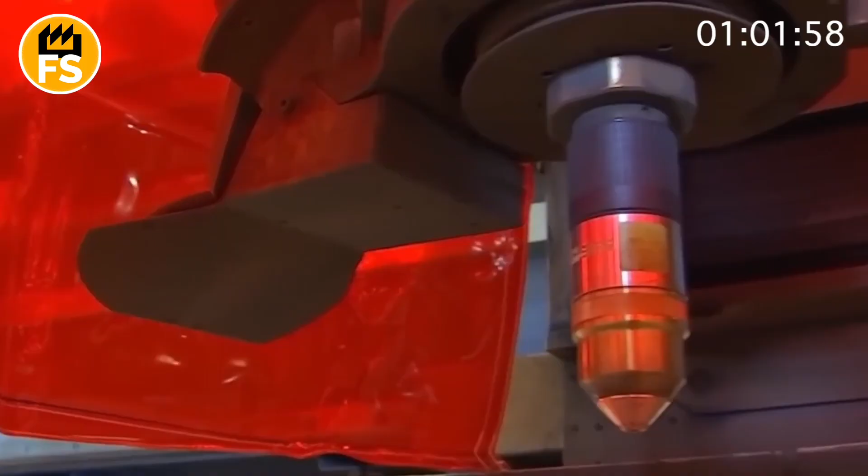The LCAC structure is not assembled entirely at once, but built from large modules. Each module, for example, the bow, stern, and side sections, is assembled separately. Rivets and aluminum welding ensure durability. The frame consists of a keel beam running the length of the craft and transverse ribs providing rigidity. Aluminum rivets and specialized adhesive mixtures are used to connect sections, reducing weight. Large modules are lifted by powerful cranes and connected precisely using laser positioning to avoid errors.

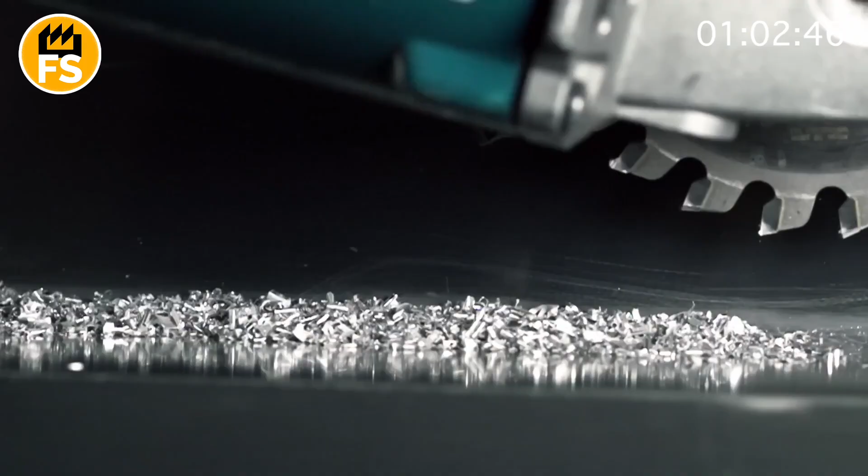At the brightly illuminated shipyard, a giant module of the future craft rises into the air. A heavy gantry crane, weighing hundreds of tons, slowly lifts the aluminum section, gleaming in the sun like the shell of a marine predator. Metal cables are stretched tight like strings, while workers in protective helmets and vests carefully monitor every movement. The enormous part floats mid-air, gently swaying in the breeze. A crane operator, sitting high above the yard, maneuvers this colossus with extreme precision. Engineers below signal instructions, guiding the module to its exact position.

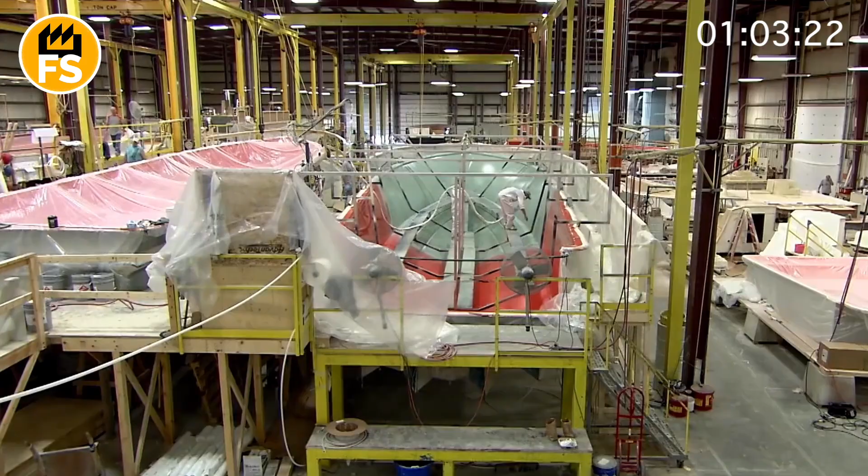When the section slowly settles into place, there's a dull metallic thud. Thousands of pounds of aluminum collide with the frame. Immediately, fastening begins. Workers tighten bolts, welding machines ignite with bright blue flames, and sparks scatter from beneath electrodes. The air fills with the scent of hot metal as the craft gradually takes shape, becoming a formidable combat machine. Engineers inspect structural integrity and tightness.

Attachment points for the hovercraft skirt are installed on the frame. This system must be completely airtight to maintain LCAC stability during movement. The completed frame undergoes load and vibration tests. After passing successfully, engines, propellers, and electronics are installed. Now begins one of the most critical stages.

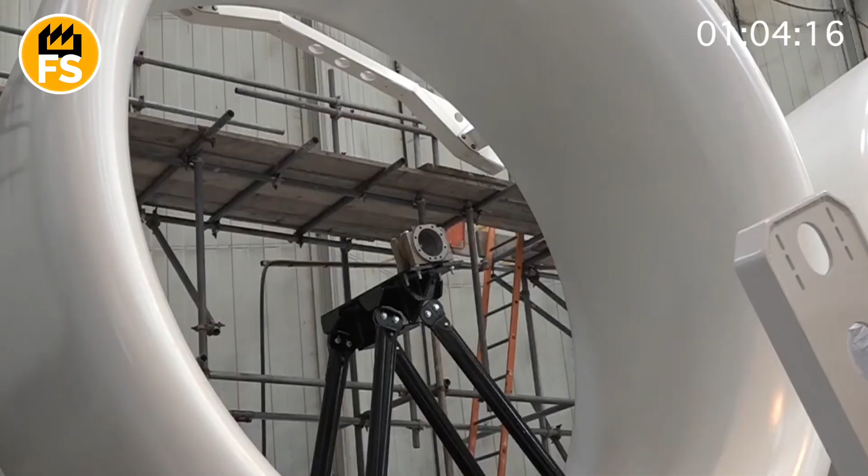The shipyard hums with crane motors, gently transporting massive gas turbine engines, the heart of the future craft. Workers dressed in protective suits and masks precisely position them in compartments, where every millimeter counts. Simultaneously, technicians attach enormous propellers, blades made from robust composite materials, which will later propel air with thousands of horsepower. When blades rotate for the first time, air waves ripple through the air, causing fabric on work uniforms to tremble.

Inside, engineers connect cables, sensors, and onboard computers, carefully inspecting every chip, screen, and controller, as navigation, communication, and automated control depend on these systems. Once everything is ready, the moment of truth arrives. Pressing the first launch button, the massive frame shudders, turbines roar to life, and the first stream of hot air bursts from exhaust channels. The LCAC is ready for its first water test.

A single modern LCAC costs from $50 to $75 million, depending on modifications. Operating costs are high due to gas turbine engines and demanding maintenance. Maintenance can occur at shipyards or specialized bases. Gas turbine engines require frequent service due to limited lifespans and costly repairs. The hovercraft skirt wears from contact with water, sand, and stones. Propellers and air systems require repairs as they operate continuously at high speeds.

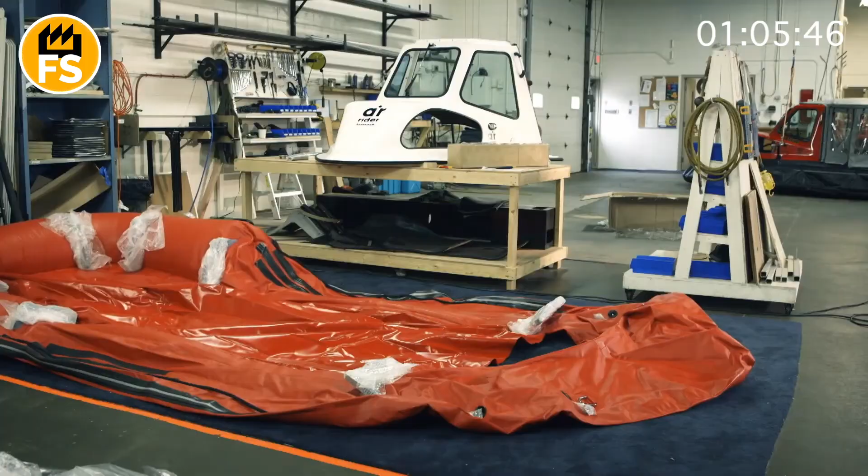The United States is the leading producer of the new ship-to-shore connector crafts, replacing older LCACs. Great Britain builds similar crafts for civilian and military markets. Who uses them, you might ask? The United States Navy is the largest operator, possessing about 70 LCACs and acquiring new models. Japan uses LCACs for defense and humanitarian missions. Potential customers include NATO countries and nations expanding amphibious forces, like India and South Korea.

Currently, LCACs are being upgraded to SSC, quieter, faster, and more efficient crafts. Demand is rising due to threats in the Pacific region and the need for rapid troop transport. Additionally, LCACs can drift. With the air cushion, they lack typical friction with water or land, allowing them to slide sideways, sharply change direction, and even pivot almost in place, making them exceptionally agile but challenging to control.

However, LCACs are among the loudest vessels in naval forces. Their noise can be heard hundreds of feet away, making them unsuitable for stealth missions. During operation, LCACs create powerful vortices, capable of literally blowing away seagulls and other marine birds, often making it impossible for them to remain airborne.